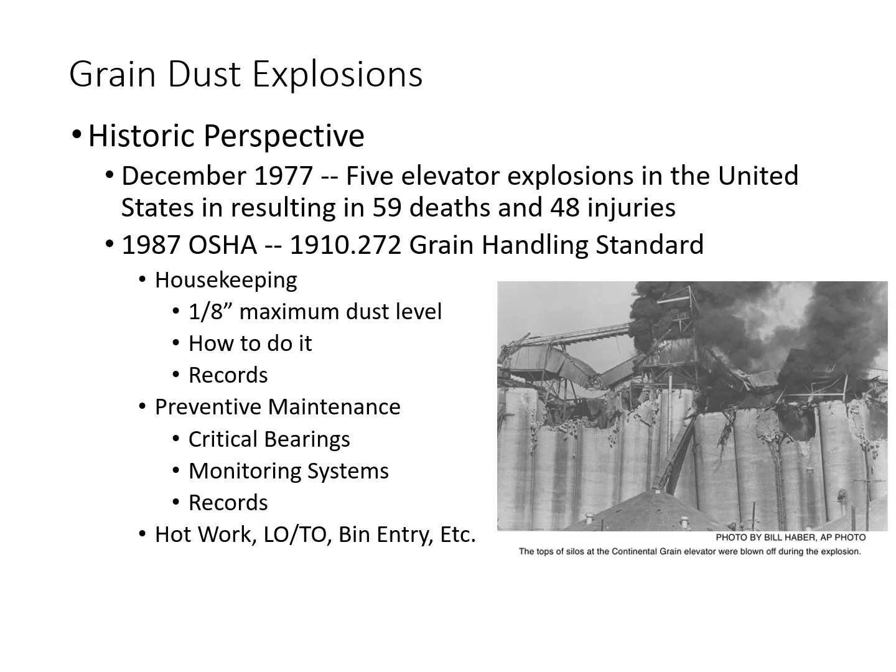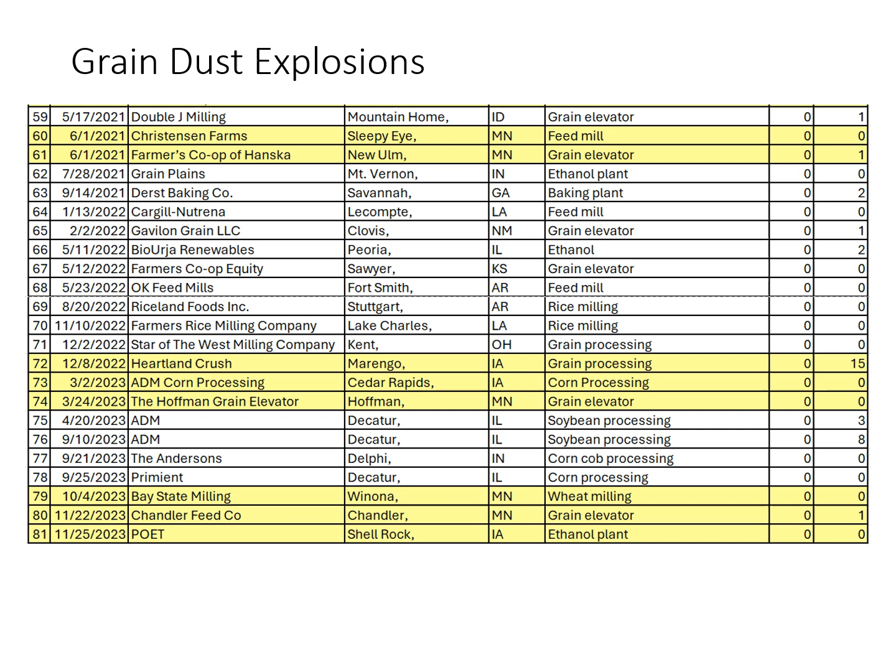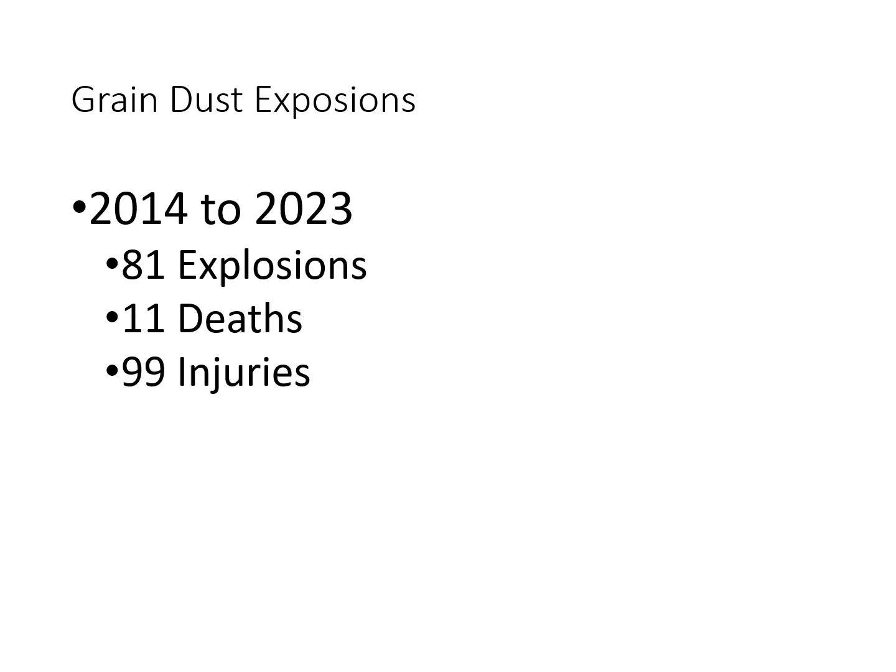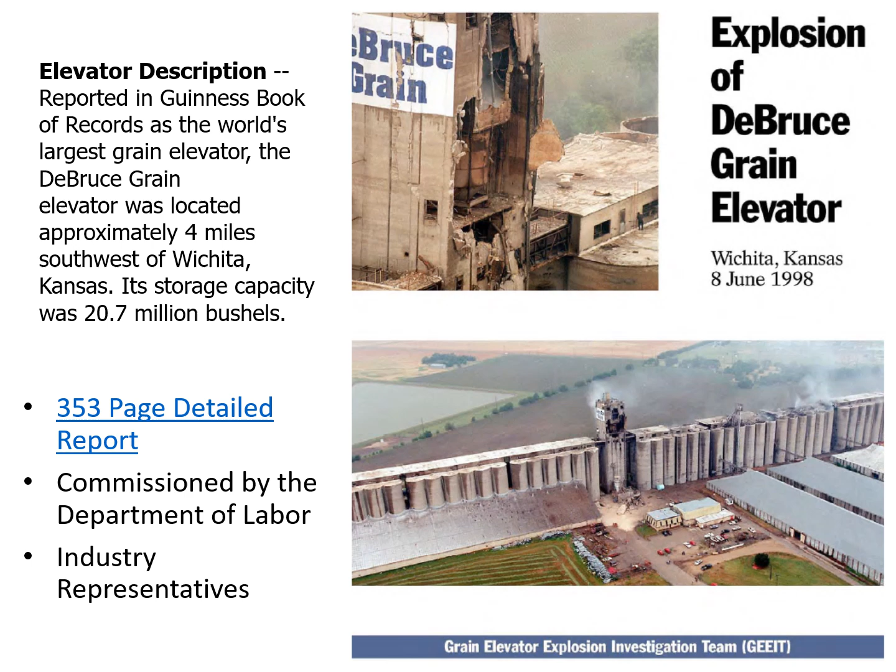But we need to do everything we can to reduce the likelihood of a grain dust explosion. Whenever I have the opportunity to talk to a group of people about grain dust explosions, I usually reference this DeBruce grain elevator explosion. I know it happened a long time ago, but the reason I feel it's a real benefit to share information from this report is that it was so extensively studied. There's a 353-page report that was commissioned by the Department of Labor, and it was very thoroughly investigated by representatives from industry, from insurance companies, from the government, and the report itself is really, really well done and very thorough.

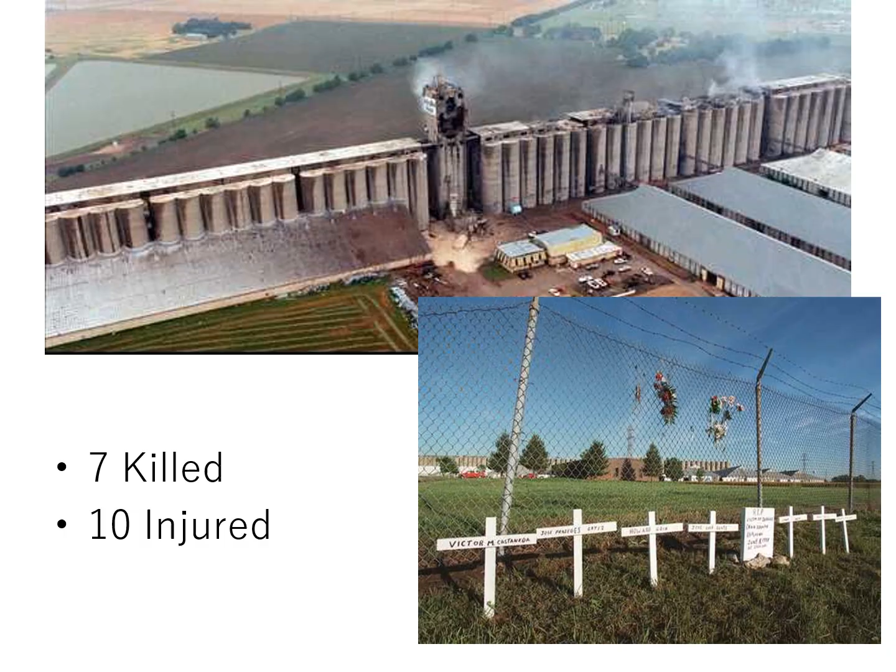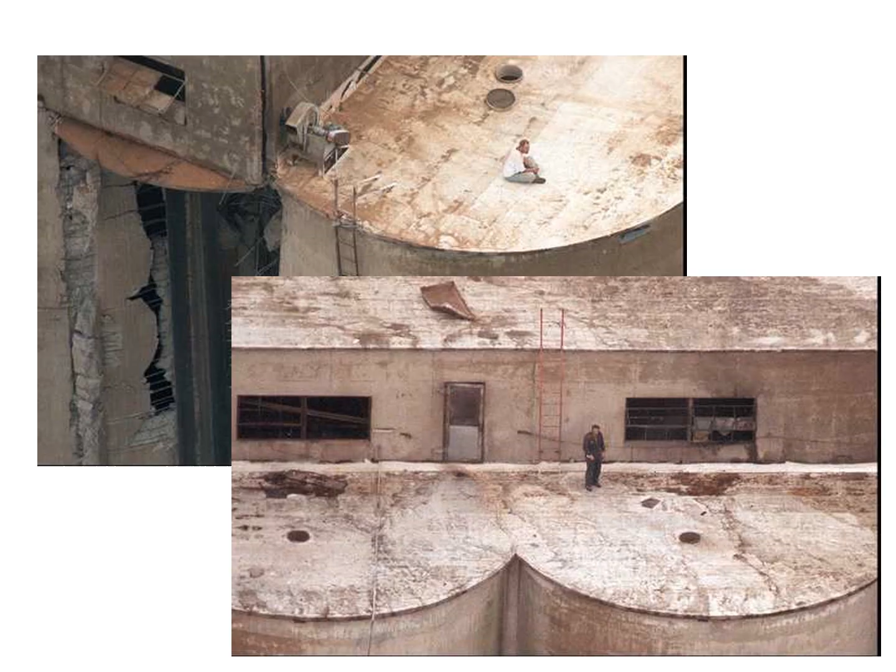More images of stranded workers, and these are the lucky ones.

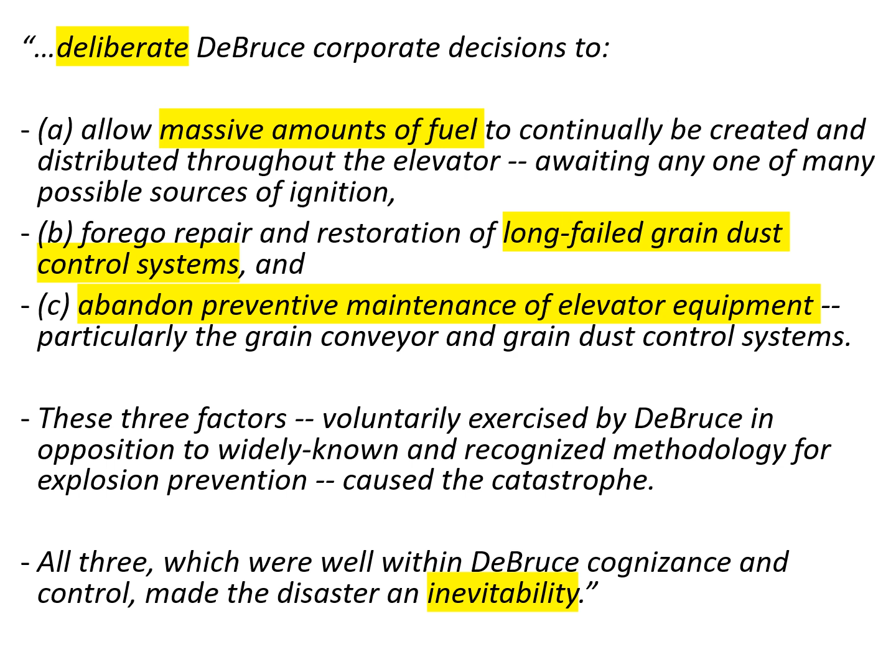So the summary of this study: basically it was a deliberate decision, and they allowed massive amounts of fuel to be created and distributed throughout the facility. They had long failed grain dust control systems that were not in operation. They had abandoned preventive maintenance of the elevator equipment. They had not replaced bearings, had not been providing proper grease and maintenance, and they basically made a dust explosion inevitable.

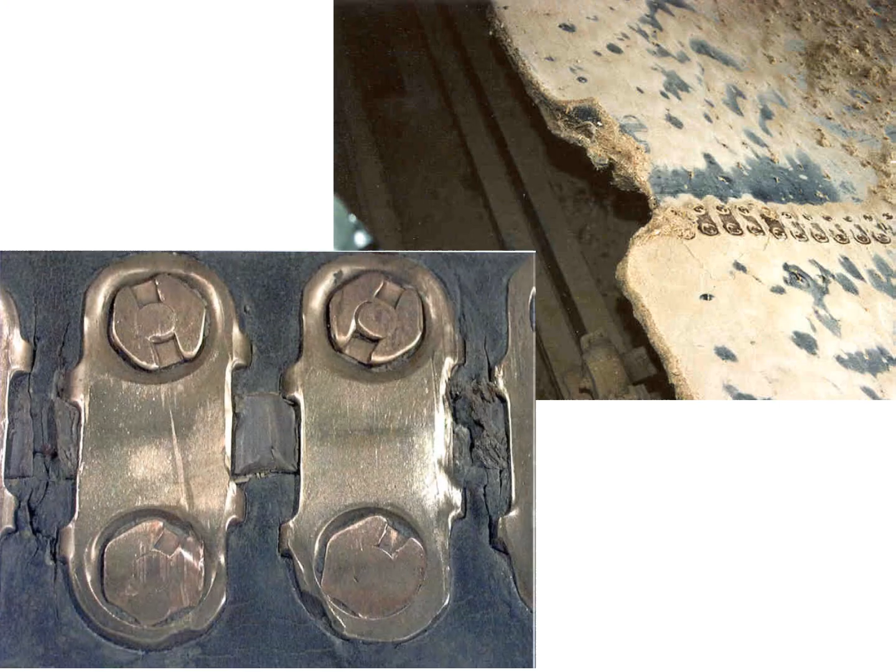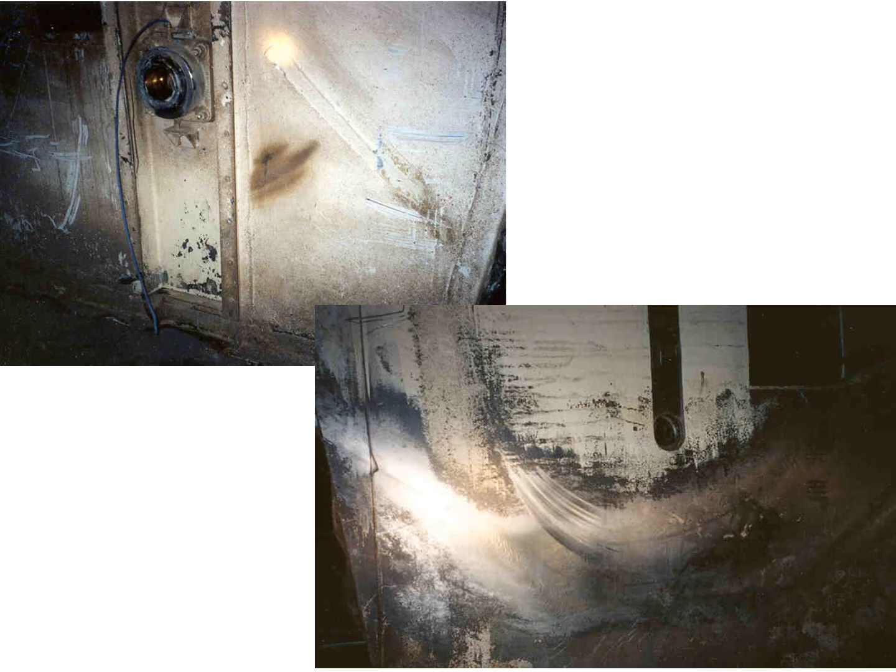Over time, the belt rubbing over that seized roller caused enough friction and heat to start a fire, smoldering in the dust. Eventually that smoldering fire generated enough heat to ignite the dust inevitably in suspension in that facility, especially in absence of the dust control systems that should have controlled the dust but were not in operation. While they identified the cause of this specific dust explosion, they also identified conditions elsewhere in the facility that could have caused a dust explosion as well.

This is the trunk of a grain leg in the facility, and you can see how the belt had been running out of alignment long enough to cut a groove in the trunking and to discolor the paint. It's fairly obvious that there was a lot of heat being generated by this belt running out of alignment.

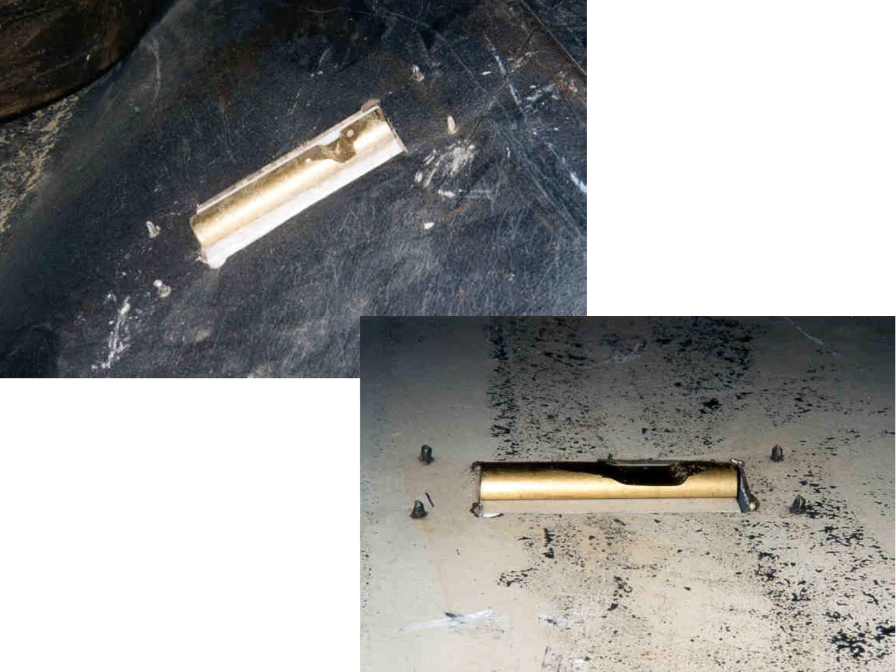These are some rub blocks, again from a trunk of a grain leg, that would signal to the belt being out of alignment. These rub blocks were not operational, and you can see the grooves that the belt had cut into them.

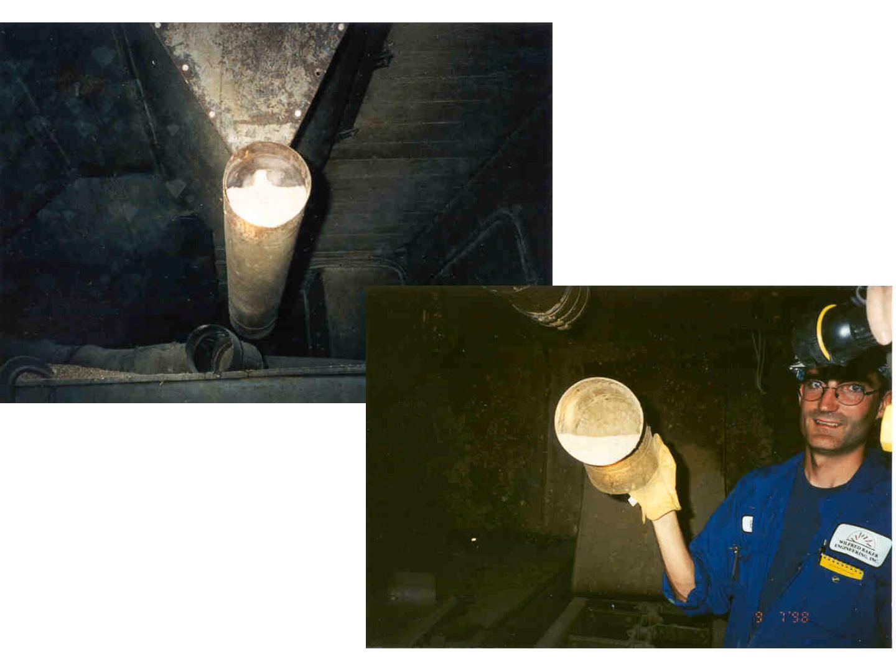These are pictures of the dust control system that was not operational. The equipment was there, it was simply not maintained and not kept in operation. At the trippers, hoppers, and transition points there would have been dust control originally on this facility, or retrofitted to keep dust levels down, and none of that equipment was operational.

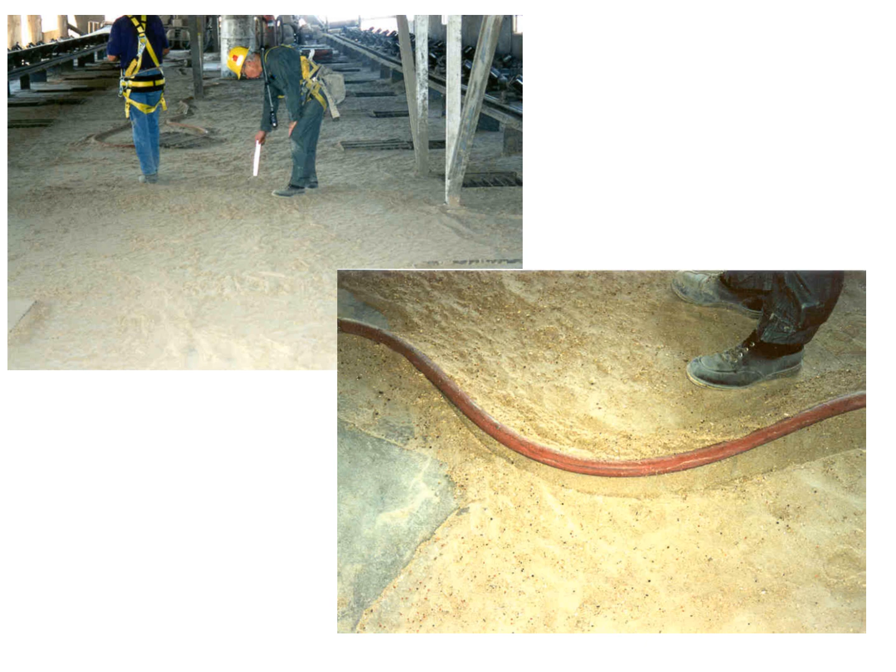Here's a picture of the dust levels up in the gallery, or the Texas house, of this facility, and you can see there's plenty of fuel here. This dust needs to be at an 1/8 inch or less in the critical areas of a grain elevator, and obviously in this case the dust levels were much higher.

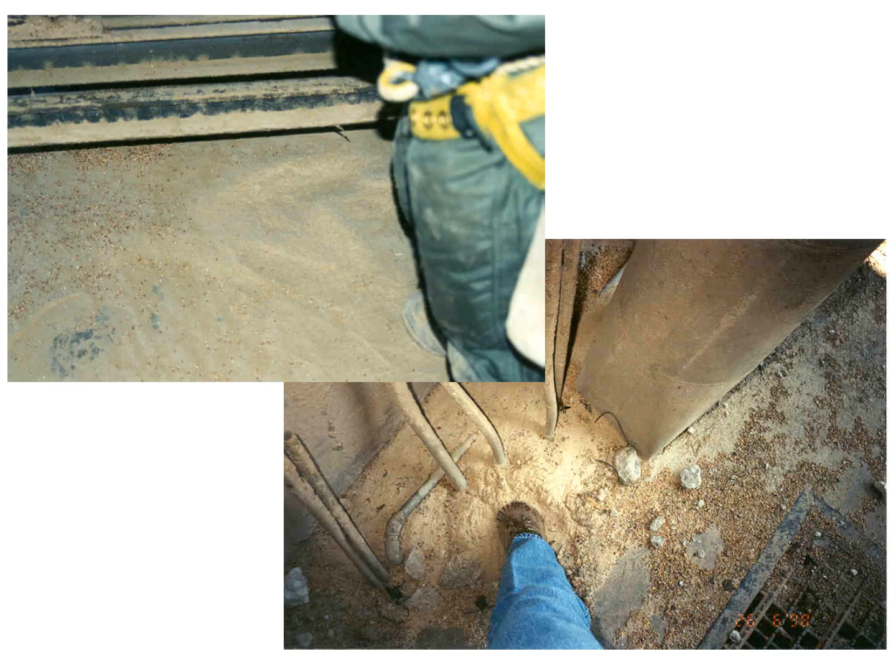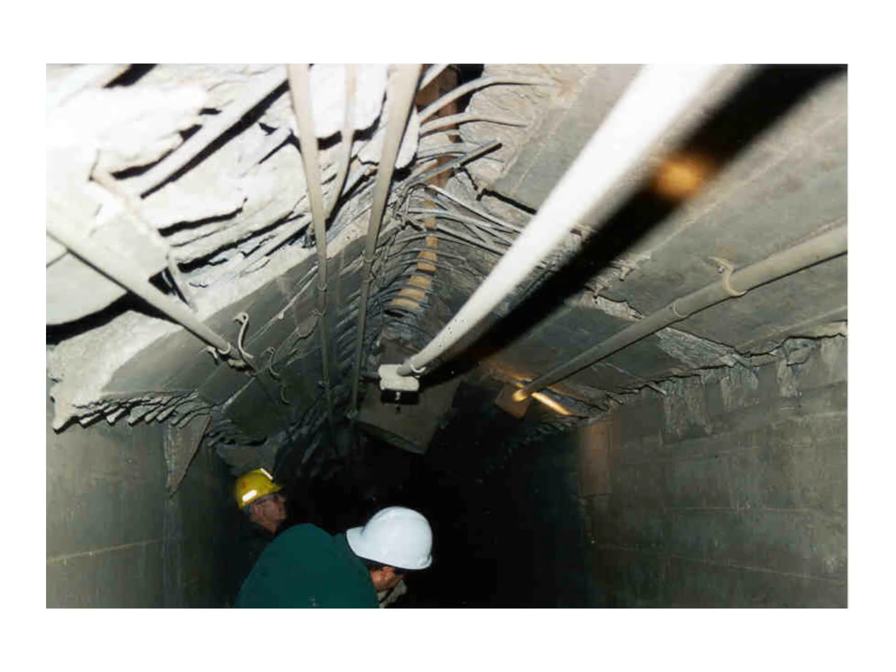More examples of the dust level in the facility. Keep in mind, after that primary explosion, all of this dust is shaken loose and suspended in the air to cause the secondary explosions that continue to blow the facility apart. Here's how the ceiling of one of the tunnels was deformed by the dust explosion.

This ceiling would have been flat originally before the explosion. Significant amount of power and pressure to cause this much damage in a facility.

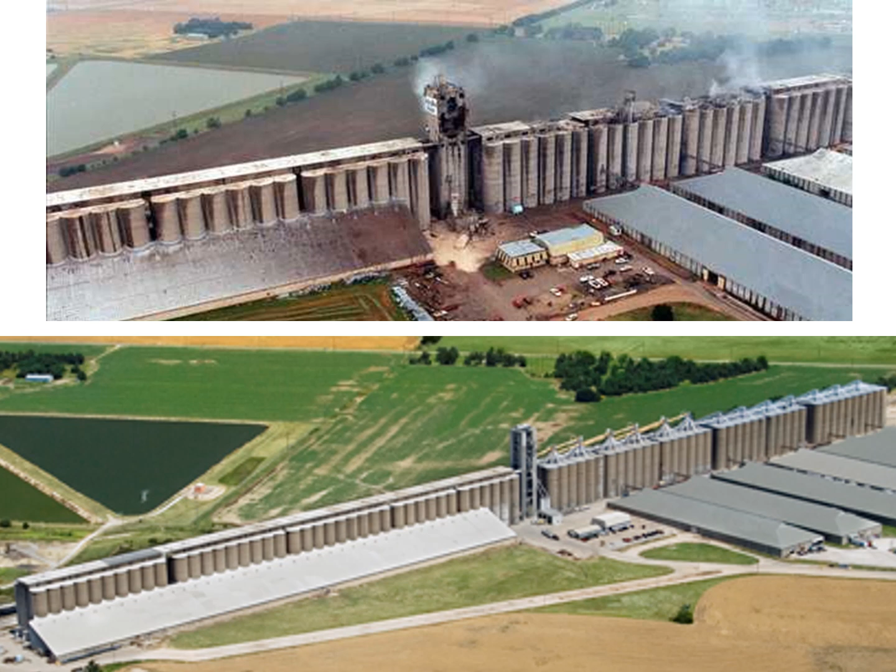Here's the before and after picture of the facility. Obviously, when we put these back, we don't enclose the workhouse or the legs anymore, so that is open air. You can also see on the right where all the damage occurred was replaced with open conveyors and more traditional distributor systems, and no longer have the open belts like it did prior to the explosion.

Another case study I like to talk about is the 2021 dust explosion in Jefferson, Iowa. The reason I like to talk about this is because this is a facility I have been through hundreds of times during my 36 years in the grain insurance business. I was lucky enough, many years ago, to work with the management at what was West Central Co-op then, and they kind of took me under their wing and taught me a lot about prevention of grain dust explosions because of some past experience they had at this facility.

We'll start by talking about this dust explosion in 2021. It was a miracle that nobody was killed or injured. What had happened is they had some grain go out of condition in a steel bin, and they were in the process of transferring that grain to deal with it. When doing that, they moved some burning or smoldering grain into their workhouse and caused the explosion that you see here.

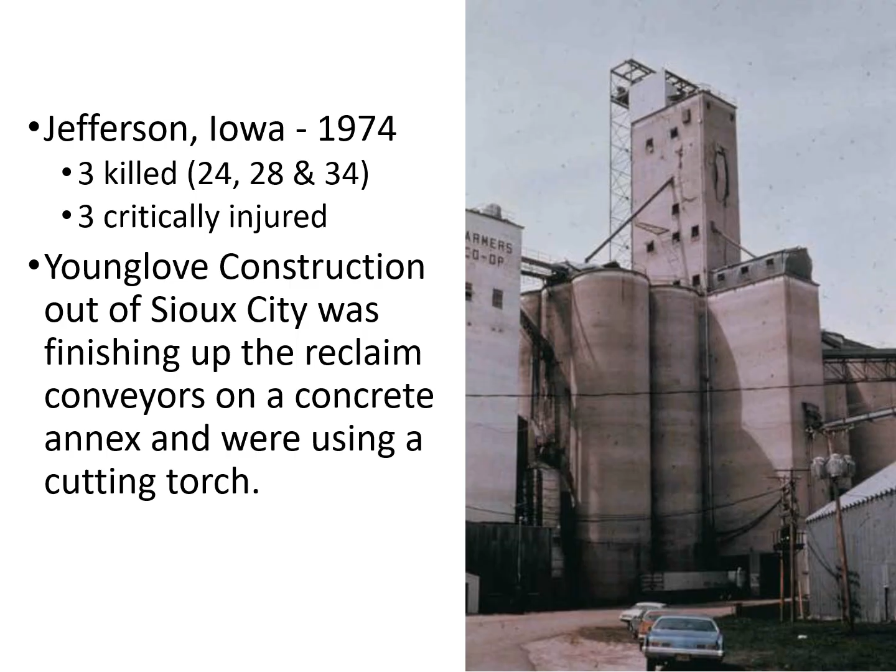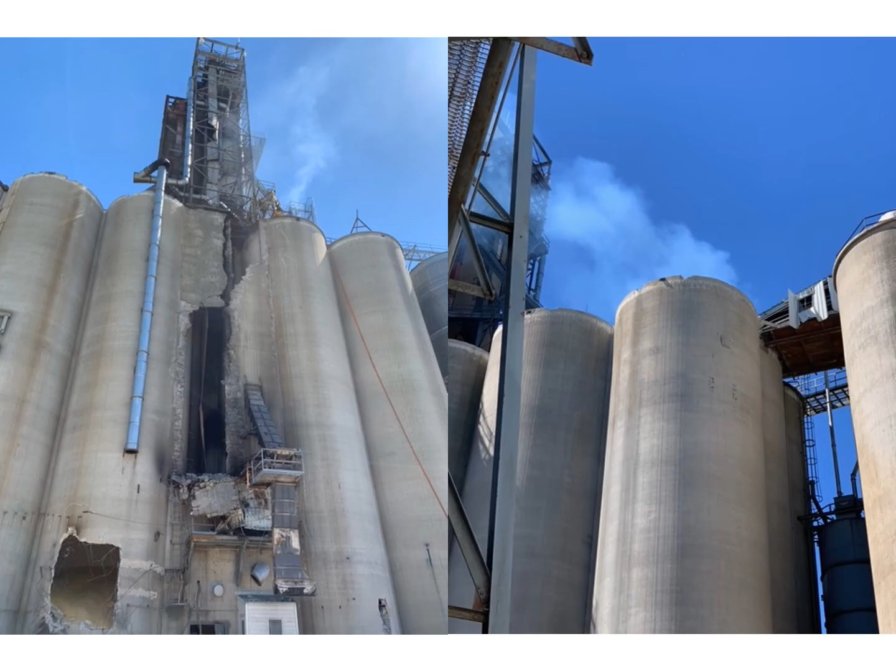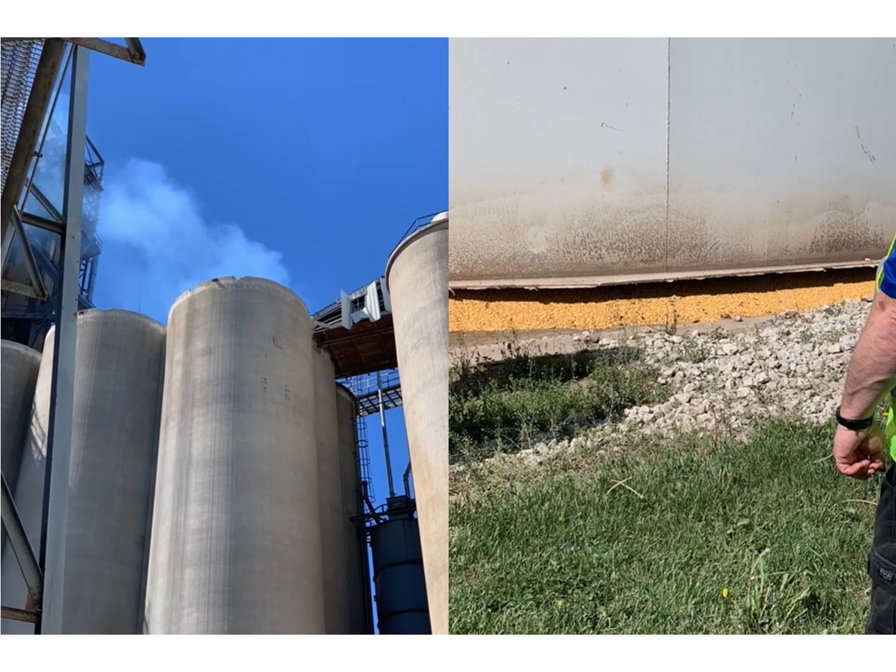Here's the back side of the elevator from the 2021 explosion, and you can kind of see the legway, the interstice, and the bin tops, and the damage that was done. If I understand the 2021 explosion correctly, the origins were in the tunnel or conveyor underneath this steel bin on the right, and that primary explosion transferred the ignition to the workhouse, where the secondary explosions caused the significant damage to that cement elevator.

So this is what was left after all the cleanup. Clearly there was significant damage to this facility, and it was subsequently torn down and replaced with a couple of concrete silos and an outside leg or legs.

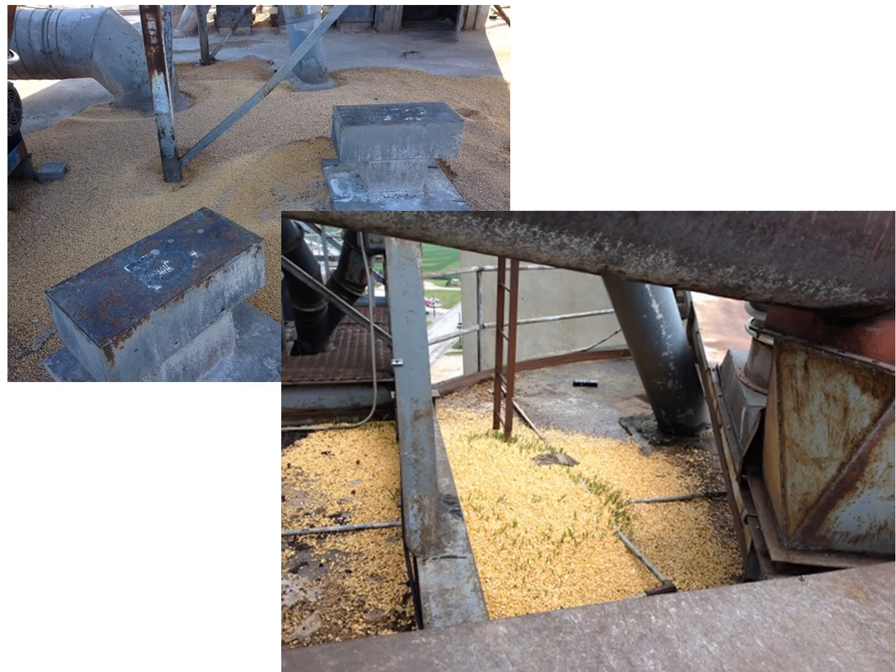Just want to share a few housekeeping slides. When I was working in the field just a few years ago, this is some of the things I would find, and quite often the housekeeping records would show that this was cleaned 2 or 3 days ago. But when I'd go up in the man lift and walk across the bin tops or down in the tunnels, I'd see housekeeping that clearly hadn't been done for a long time. That lower right picture, you see the corn sprouting and growing on that roof. You've got to maintain your housekeeping.

It's very important. Even though this doesn't necessarily contribute to a dust explosion, it certainly does contribute to the deterioration of that roof. If you cause some heat or some spalling, the watertight integrity is going to fail. Then you're going to start getting water into your bins, and that's going to cause spoilage and heat and grain hanging up, and all kinds of issues that you just don't want.

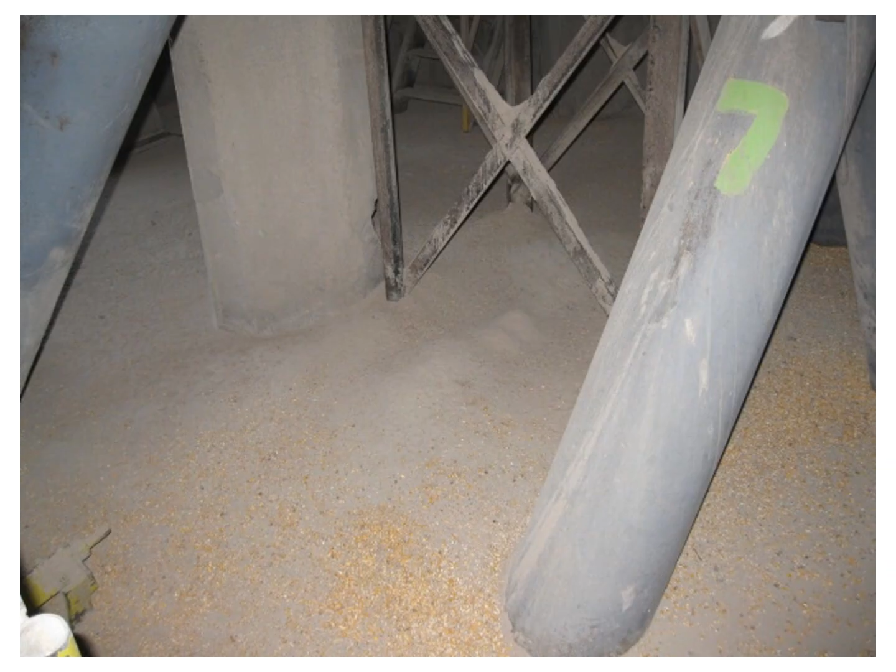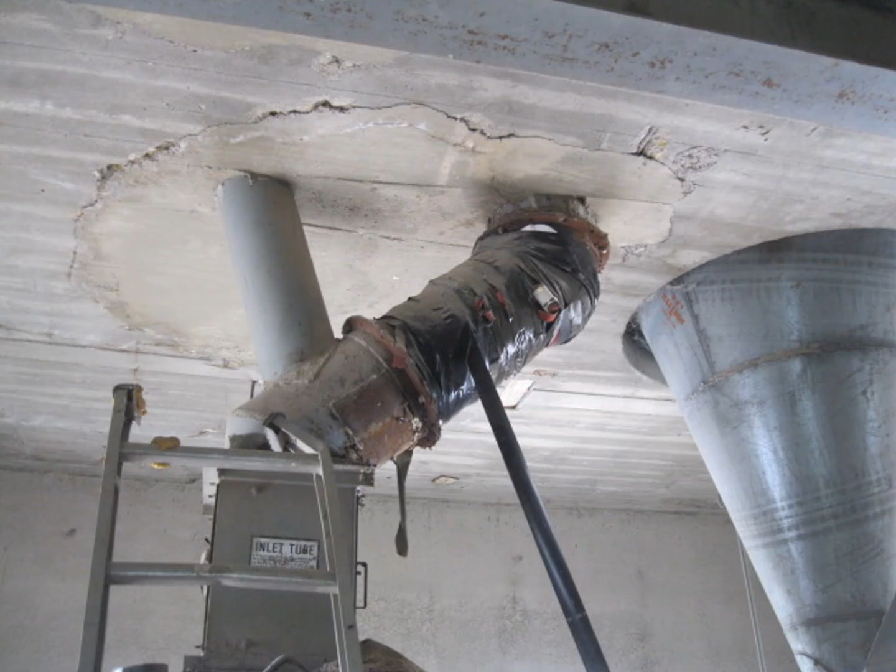So housekeeping is critical for a number of reasons in a grain facility. Just another example of a leak that generated and didn't get addressed, and it amounted to a real mess that needs to be cleaned up and maintained. And this is just an example of some deferred maintenance. We've got a ratchet strap mixed in there, a lot of duct tape, and a crappy ladder as well that's upside down and bent—just a condition that exists at the facility that needs to be cleaned up and fixed.

And this is just my last housekeeping example I'm going to give. Again, this is a facility where their housekeeping log showed they had cleaned this boot in the last week, and no, they hadn't. I mean, the levels of dust hanging on the cobwebs and all of that just shows that the housekeeping has been very lax. And this is the kind of thing that causes a tremendous amount of fuel if you ever do have an ignition source and a primary explosion.

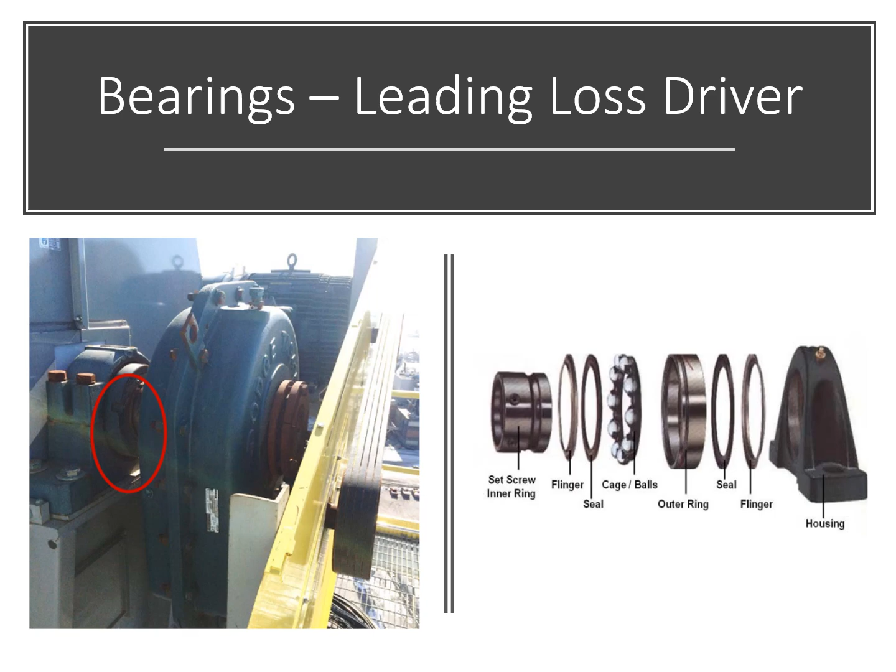We can't talk about grain dust explosions without talking about bearings. Bearings are the leading cause of grain dust explosions, and they require a lot of effort in record keeping and in preventive maintenance. And again, the grain handling standard specifically addresses preventive maintenance and critical bearings. And as I said, bearings require periodic maintenance and changing them out.

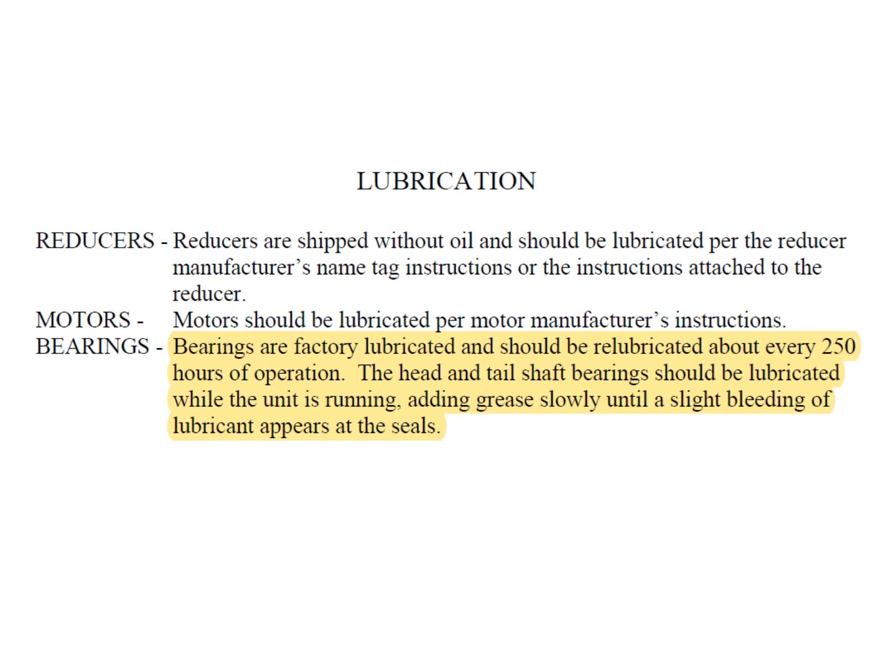And a lot of these guidelines are found in the original manuals that come with the equipment that you have in your facilities. And obviously with the age of our facilities, sometimes that's not an easy thing to do. So for that, you need to work with your millwrights or your construction folks and put a plan together and make sure that these bearings are lubricated appropriately and maintained and changed out at the intervals that are recommended. Here's an example of a form for bearing analysis and the schedule that you would use.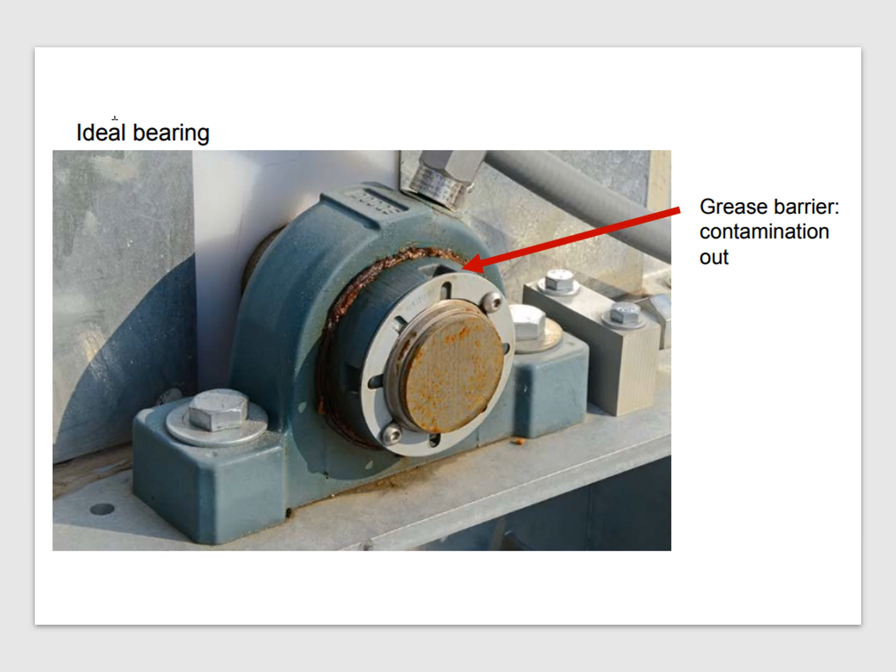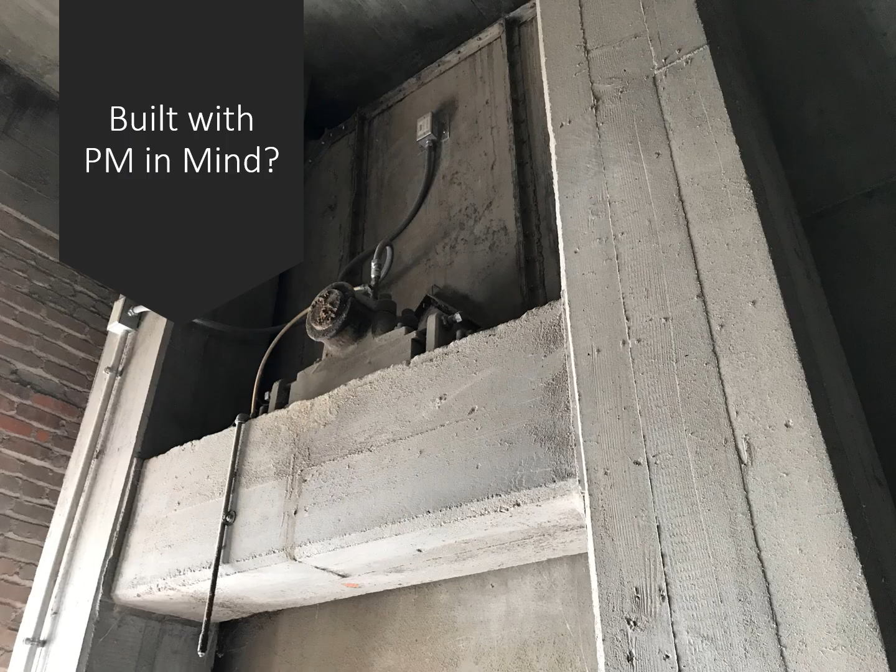A lot of the bearings in our grain facilities are hard to get to. This is an example of a leg head in an older grain facility, and you can see on the left side there they have a remote zerk that actually feeds up into the bearing to make it possible to grease it from the working surface and not having to use a ladder. So just think about that as you're going through. The easier you make the preventive maintenance, the more likely it is that it's going to occur.

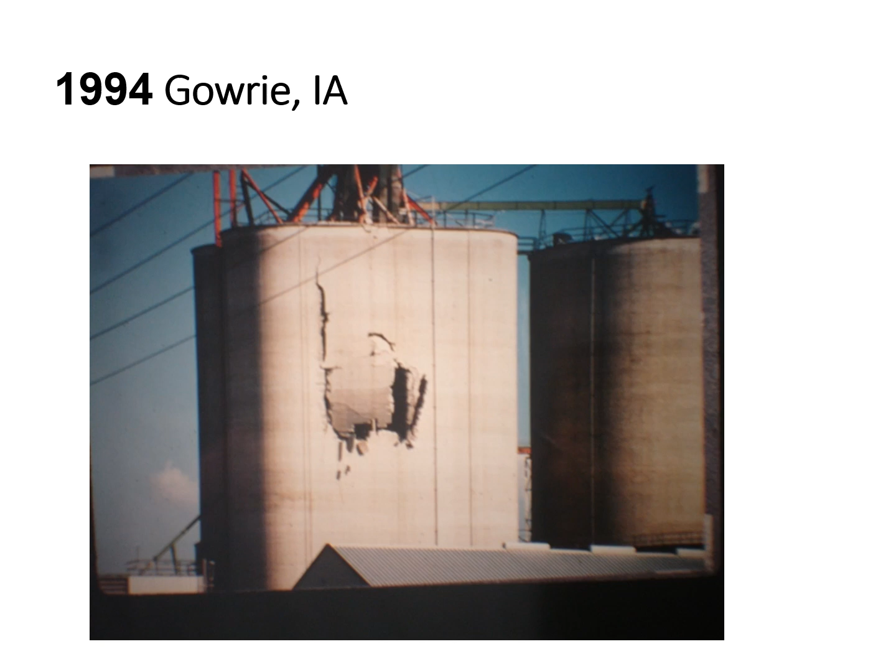Another part of the grain handling standard has to do with hazard monitoring equipment, and we're going to talk a little bit about that. This dust explosion happened back in 1994 in Gowrie, Iowa, and I was very familiar with this facility back then, and I was able to get on site shortly after the dust explosion. I've got a slide tray somewhere with a lot more pictures, but this is all I have right now.

This dust explosion caused one fatality and one very serious injury, and the elevator worker was standing on the dump grates when the explosion occurred, and she was literally blown out of her boots and was killed. Her body landed on the roof of the flat grain storage adjacent to the grain elevator. And the truck driver was down in the boot investigating the belt speed alarm, and he suffered very serious burns when the explosion flashed past him on its way out of the facility.

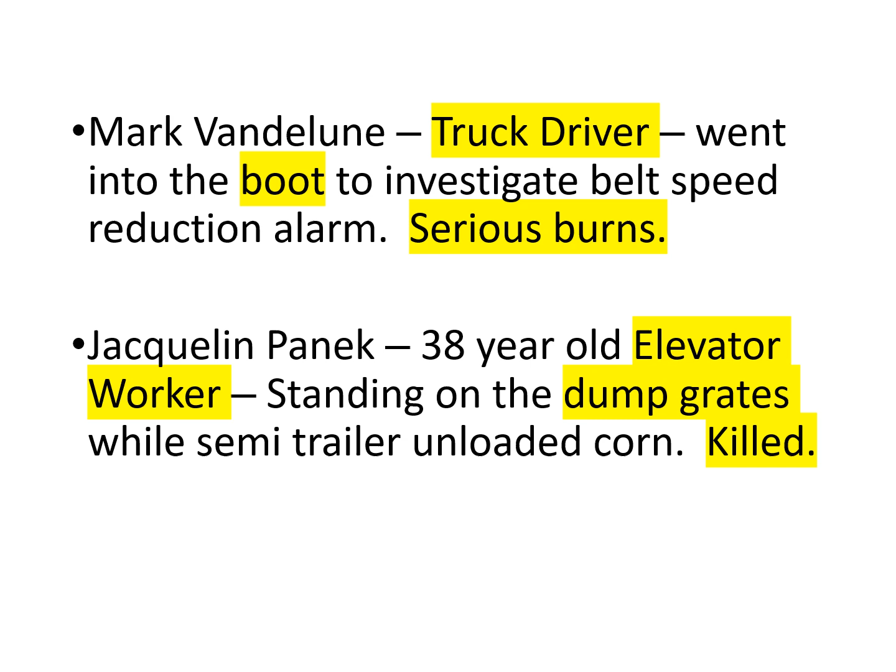The cause of this explosion was actually a slipping belt, and a fire started at the head of the leg when the belt slowed down and the belt was slipping. And it turned out the speed monitor was installed incorrectly on this leg. Nothing was connected to the 10% slowdown alarm. Instead, the 10% slowdown alarm was connected to what should have been the 20% shutdown. And then there was actually no automatic shutdown that should have been installed at that 20% level.

So the truck driver just happened to be in the tunnel to investigate the alarm when the explosion occurred, and the worker was on top of the grates and was killed when this explosion occurred.

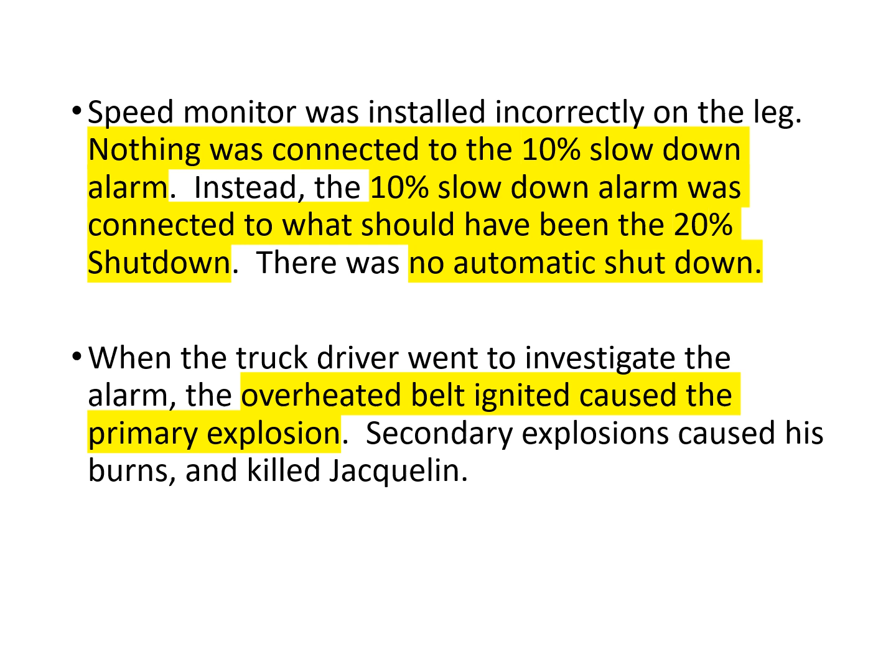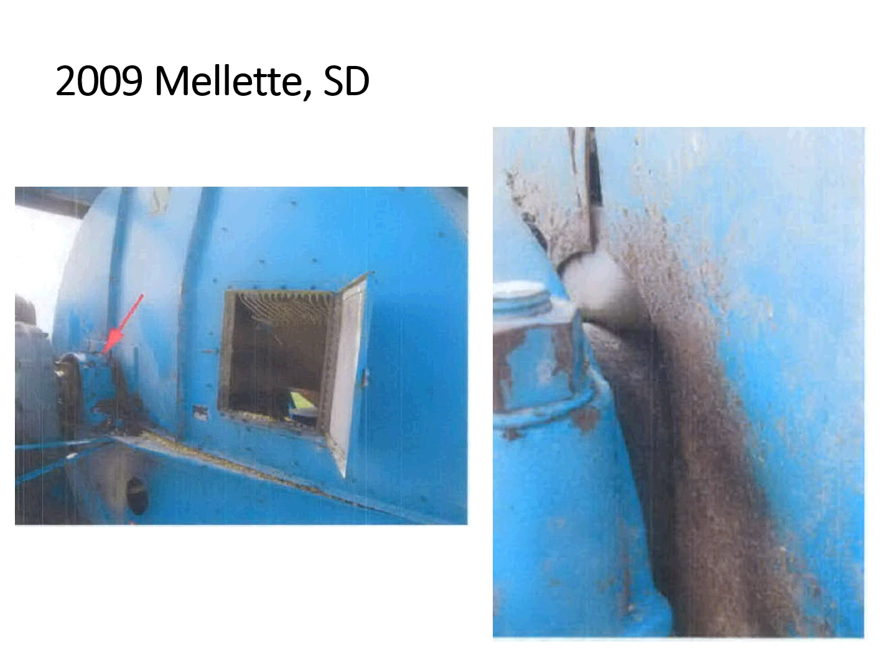Another example I like to share as it pertains to hazard monitoring equipment is this dust explosion that happened, again, a long time ago. This was in 2009 in South Dakota. This is one of South Dakota Wheat Growers' or Agtegra's facilities back in the day. And this was a bearing failure at the leg head in a relatively new grain facility.

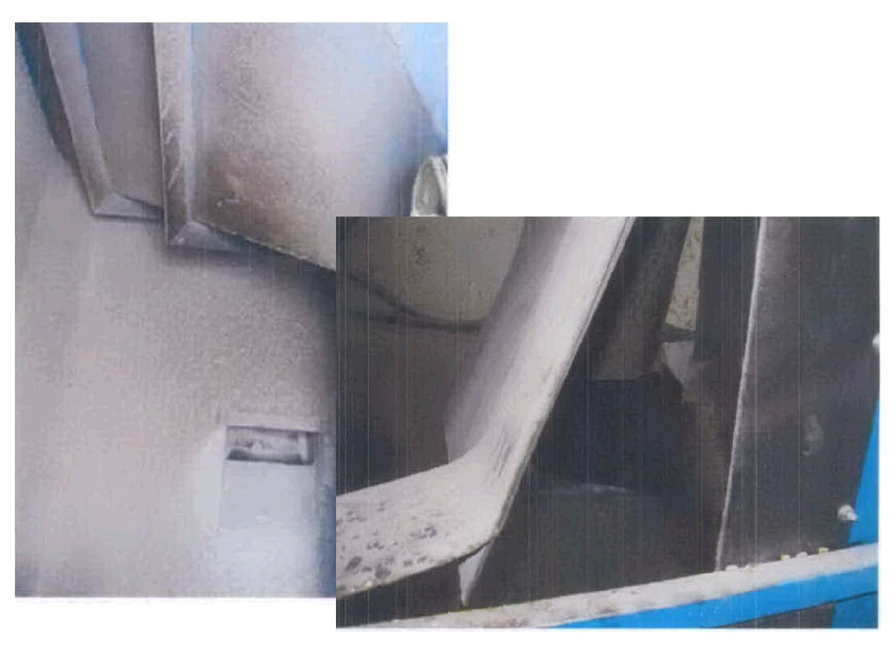So in this case, a bearing failed on the leg, and the primary explosion occurred in the leg, and it was able to vent through kind of a workroom in the concrete elevator, and this is the door to the outside where the explosion was able to vent. And I can't remember if this was a scale hopper or a cleaner of some kind, but this is again where that primary explosion was able to vent relatively harmlessly to the outside.

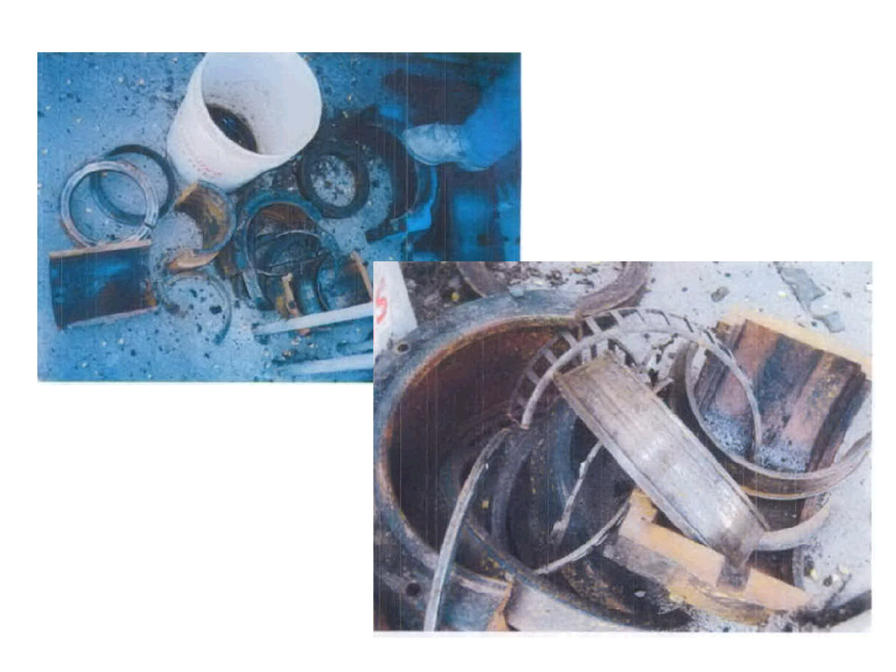Here's the bearing that failed, and you can see it's a very large bearing. The shaft diameter is roughly the same as a 5-gallon bucket, so a big bearing, and it was relatively new. So this was a case where the hazard monitoring would have been very helpful in identifying that this bearing was getting hot and about to cause a problem.

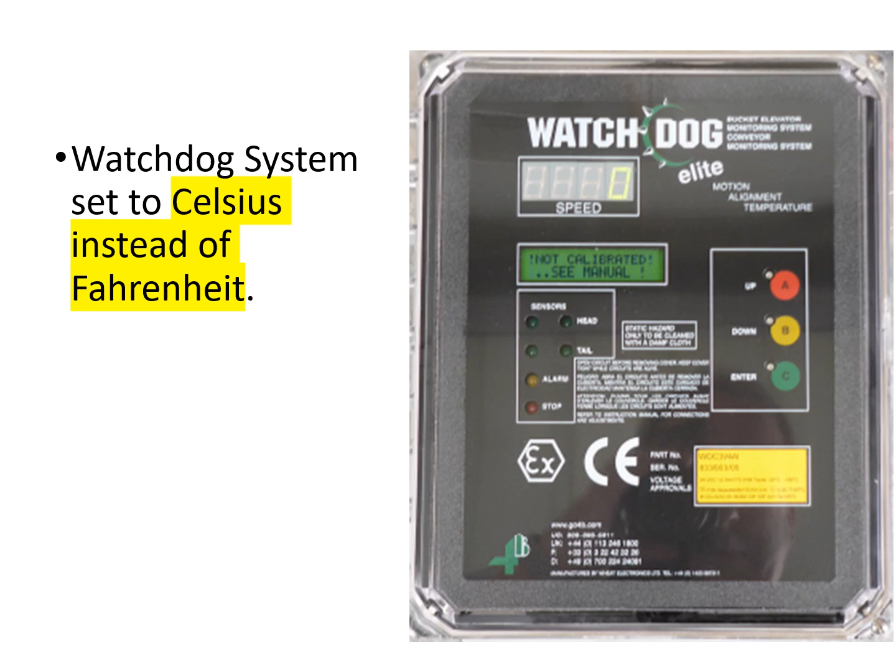Unfortunately, the Watchdog system in this facility was set to Celsius instead of Fahrenheit, and the set points were such that the alarm didn't indicate that the bearing was hot, and it allowed the bearing to get hot enough to cause this explosion.

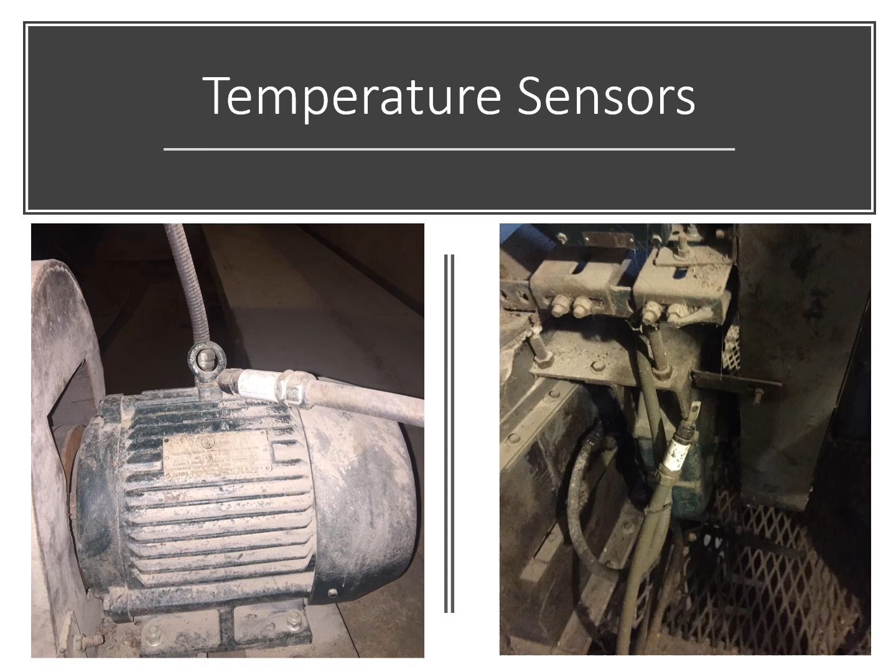But there, the gearbox is leaking, and in fact, it was low at the time of my inspection, and I'm guessing it actually was getting hot, and that the alarm that was going off because of that gearbox temperature was indeed justified, and that's a problem. When you have an alarm going off, you need to investigate it and fix it. Don't just disable or disconnect the sensor.

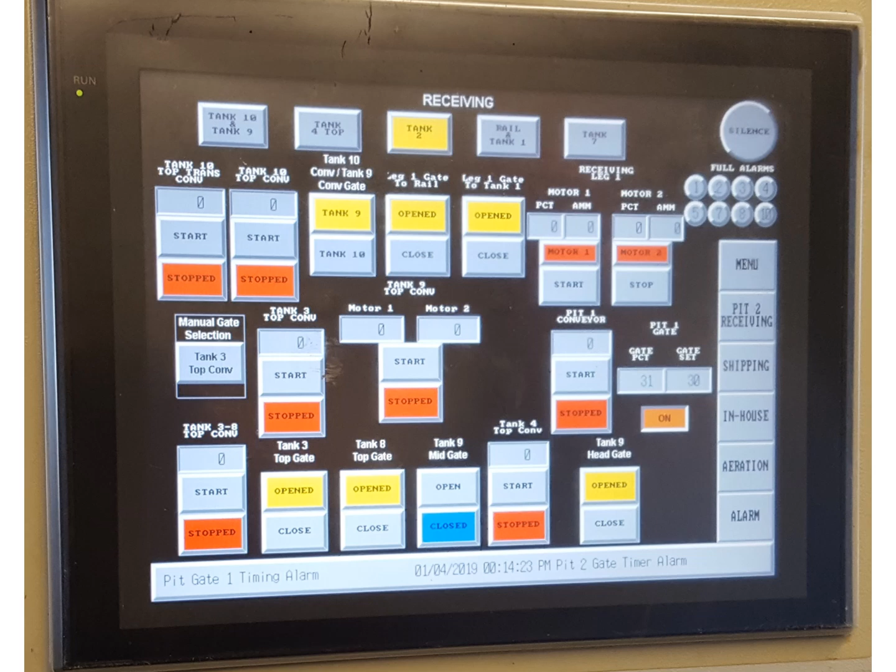And if you work at one of these facilities, I really encourage you to become familiar with your hazard monitoring systems and to audit it yourself. Check and make sure that the set points make sense. And you might need to vary these depending on the weather conditions and the ambient temperatures. In the middle of winter, when it's 30 below zero, you're probably going to want to have different set points than in the summer when it's 100 degrees with the sun shining on the bearings. So just kind of keep that in mind as well.

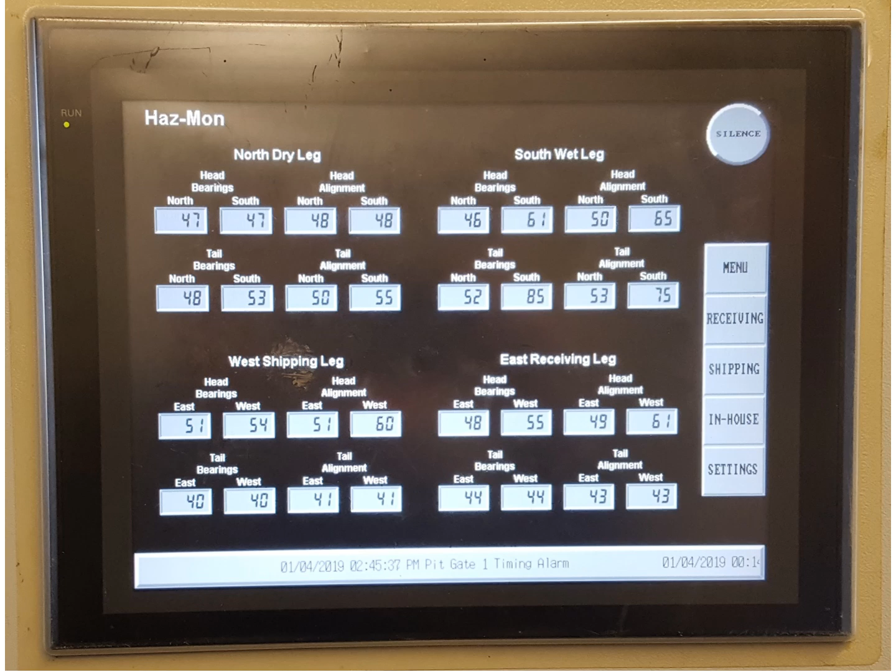Educate yourself, get familiar with the equipment, and change these set points as it makes sense and as you're instructed to by your management and your safety personnel. Here's just an example of another type of alignment sensor on a grain leg, and these are very critical in maintaining the safety of a grain handling operation. And again, inspect, and as you're walking by something, look and make sure they're in place and doing what they're supposed to be doing.

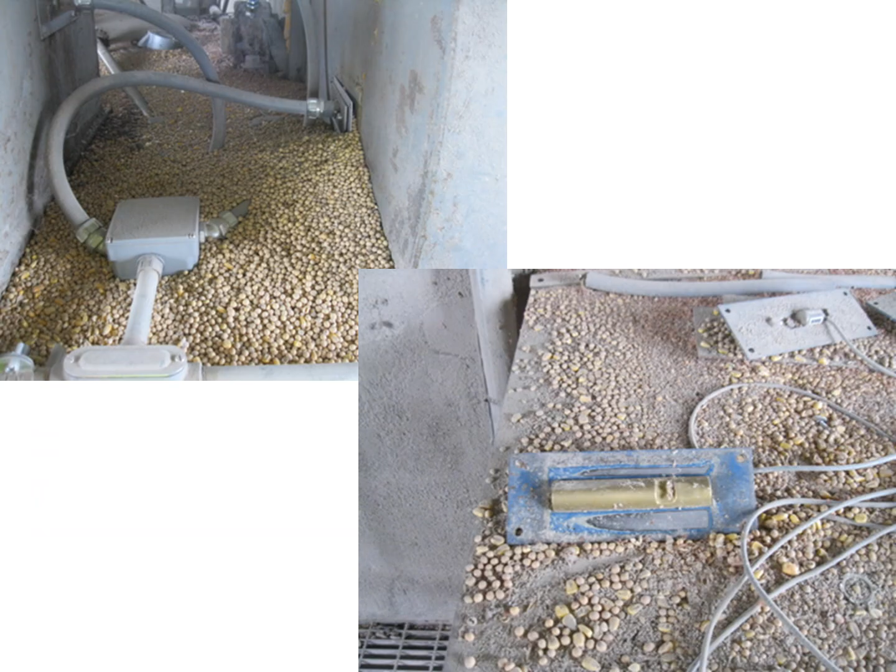Here we've got an example of, in addition to the bad housekeeping, rub blocks that aren't maintained and in place the way they should be on a grain facility. Electrical systems are another source of heat that can lead to a dust fire or a dust explosion. This is something we see quite often in grain facilities.

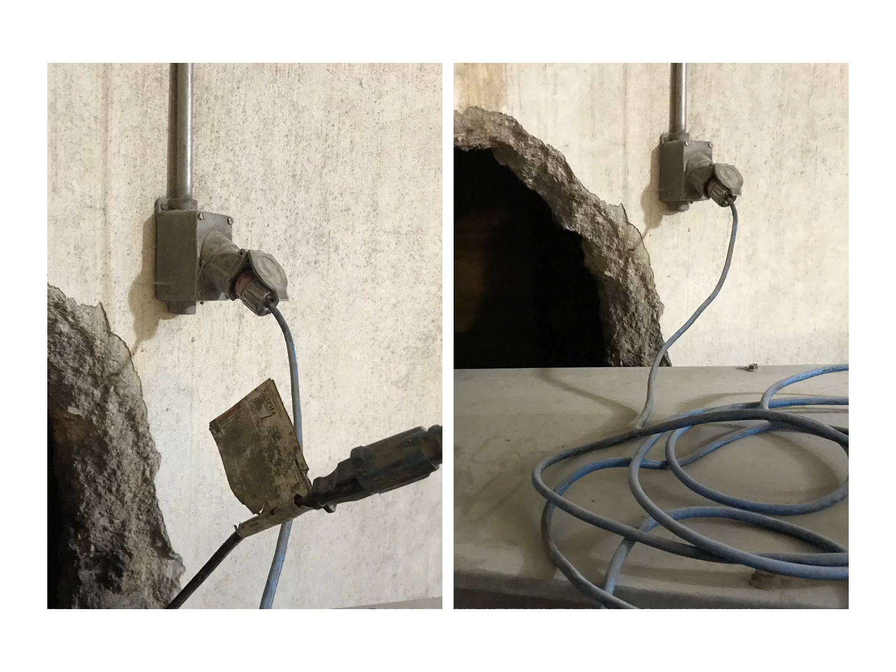In this example, they're running a sump pump using a pigtail that takes the approved, intrinsically safe, dust-tight electrical system and just turns it into a standard power cord. This is not a safe operation in a grain facility. There's just too much dust present. If you need a sump pump, you're going to have to find an intrinsically safe sump pump that is not going to cause a potential ignition source in the dusty environment.

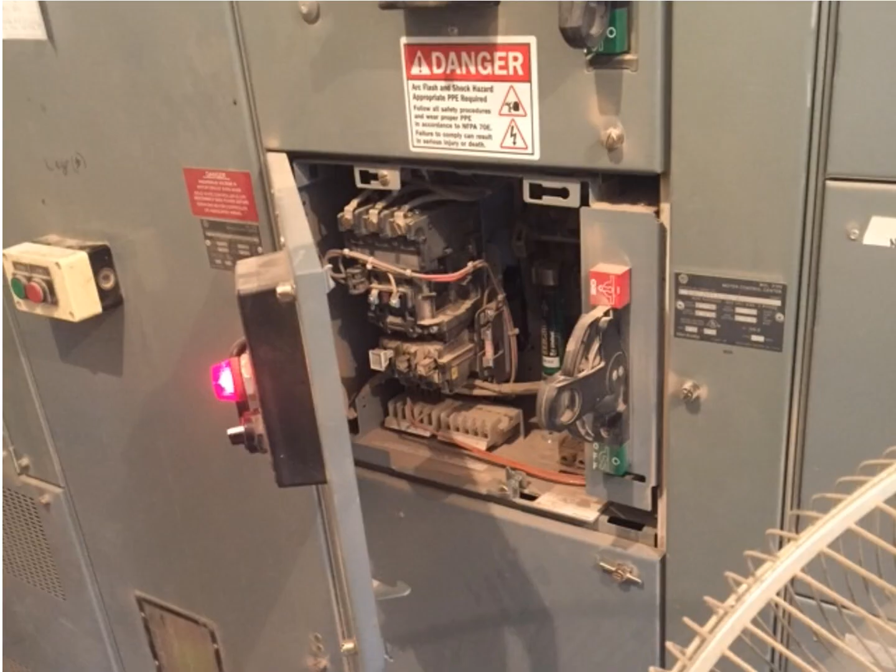Part of your maintenance program at your grain facility needs to include a good clean and tighten program with a licensed electrician who comes in periodically and just maintains the equipment and makes sure everything's clean and tight.

I'm a huge advocate for thermal imaging, infrared analysis of your facilities. I can't remember a time when we did a thermal analysis of a grain facility and didn't find at least one significant issue. And your insurance companies typically have the manpower and equipment to do this. And I would encourage you elevator folks to have your own thermal imaging camera to do this type of work yourself. You don't have to necessarily open the panels.

You can find a lot of issues by just taking the camera out in your facility while it's in full operation under full load and looking for hot spots. Not only will thermal imaging find electrical concerns and loose connections and malfunctioning equipment, but it's also going to find hot bearings or hot motors or other issues that you might not otherwise have a sensor on or that you might not otherwise identify. And I would also encourage, if you have your own equipment, utilize your insurance company folks to train your people.

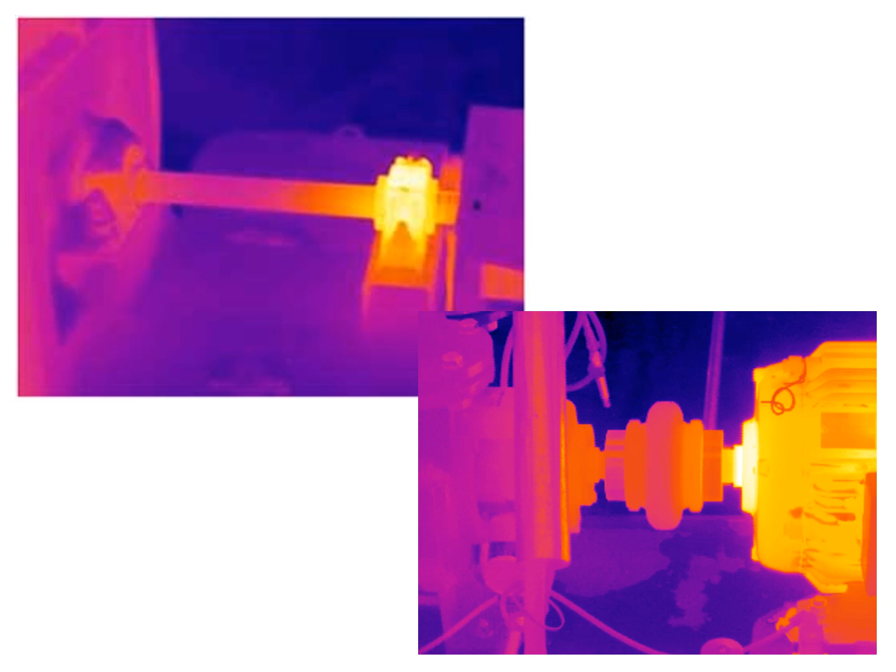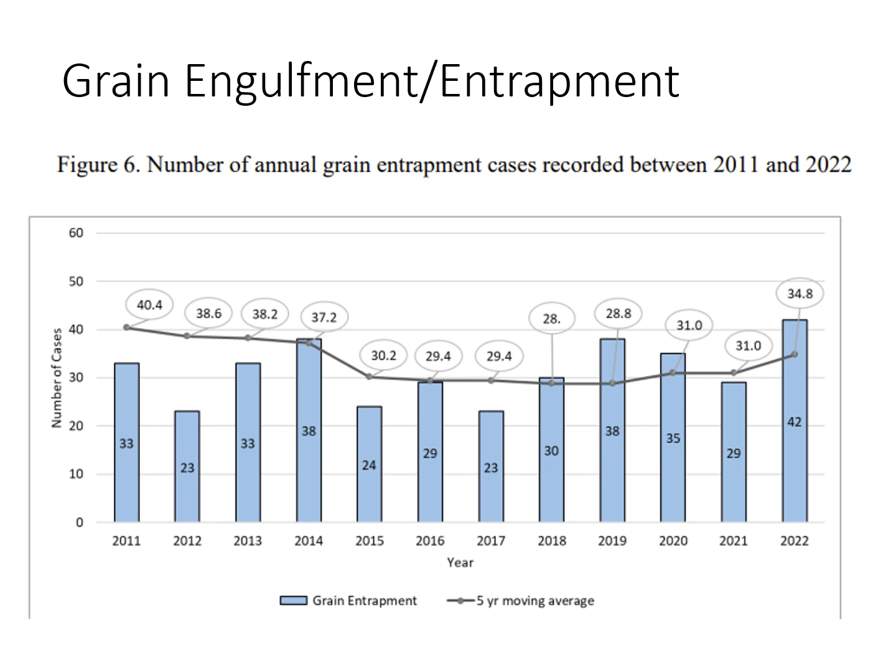Most of the engulfment situations that I've worked with have been a result of complacency. We have folks that spend a lot of time around grain and they feel very comfortable and they're willing to put themselves in a situation that they certainly wouldn't put their kids or, in a lot of cases, their employees, because a lot of these end up being a management level person who goes into a bin, maybe comes in early, maybe comes in on a weekend and does a task where they can maybe avoid some of the paperwork and some of the extra effort, thinking they're going to do it just like they used to do it.

So anyway, complacency is something that I define as the more time you spend dangerously close to a recognized serious hazard and are not injured, not only do you not recognize the hazard, you actually feel safer than when in an unfamiliar setting absent of any recognized hazard.

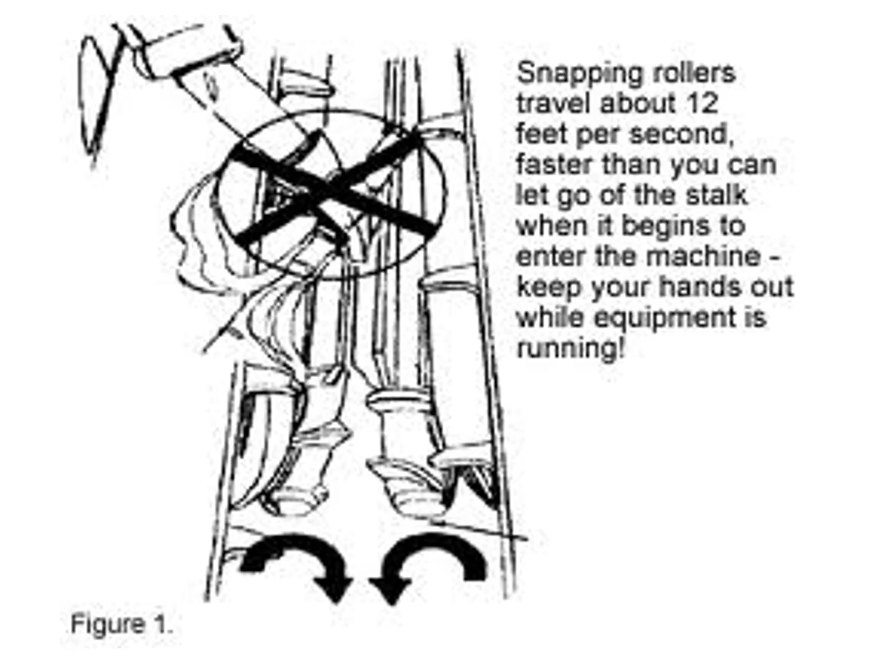diagram from an operator's manual from back in the day, and it talks about the snapping rollers that actually gather in the corn into the picker, travel 12 feet per second, faster than you can let go of the stalk when it begins to enter the machine. I personally knew 4 area farmers where I grew up that had lost either the hand or their entire arm and had farmer's hooks because of corn picker accidents.

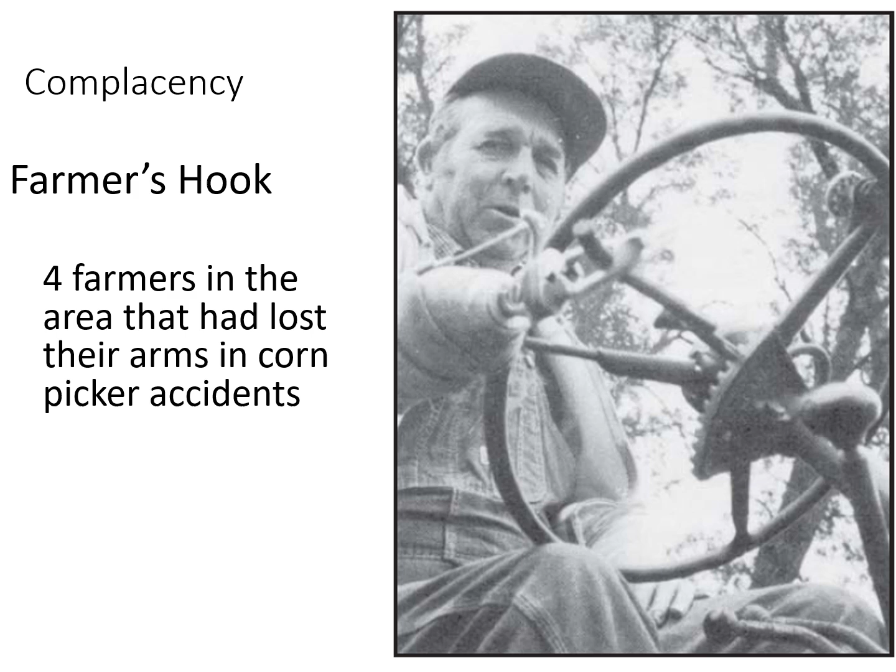The warning was clear. They knew that their neighbor had been injured, and yet they were still willing to take the risk to grab that plug while the equipment was running, and they suffered a serious amputation injury because of it.

Some of what makes these grain bins so hazardous, you can have bridged or hung up grain, and when the grain flows, whether from just normal reclaim or if there's some material hanging up or some spoilage and you end up having an avalanche or a grain flow from that, you can be quickly engulfed in grain. Entanglement can be caused by sweep augers or any of the other kind of reclaim equipment or conveyors that are out there.

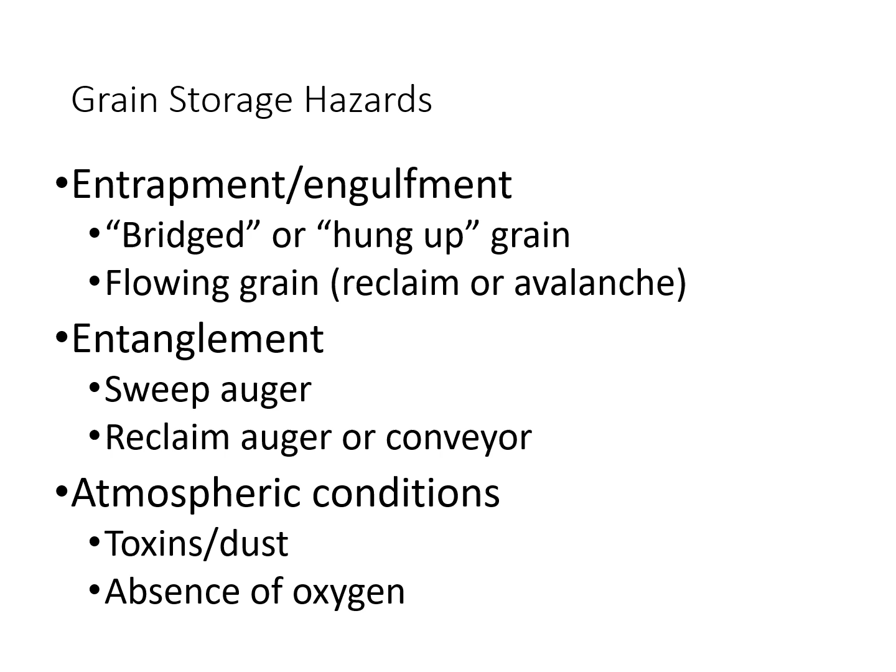And then there are also atmospheric conditions, toxins and dust, and then the absence of oxygen because of the spoilage or other things that could be welding or other things going on inside that space. Typically, bin entry is because of some grain quality issues. You have some spoilage going on, and there's a lot of information on how to properly store grain. Every land grant university has guidelines on temperature and moisture levels when grain's going into storage.

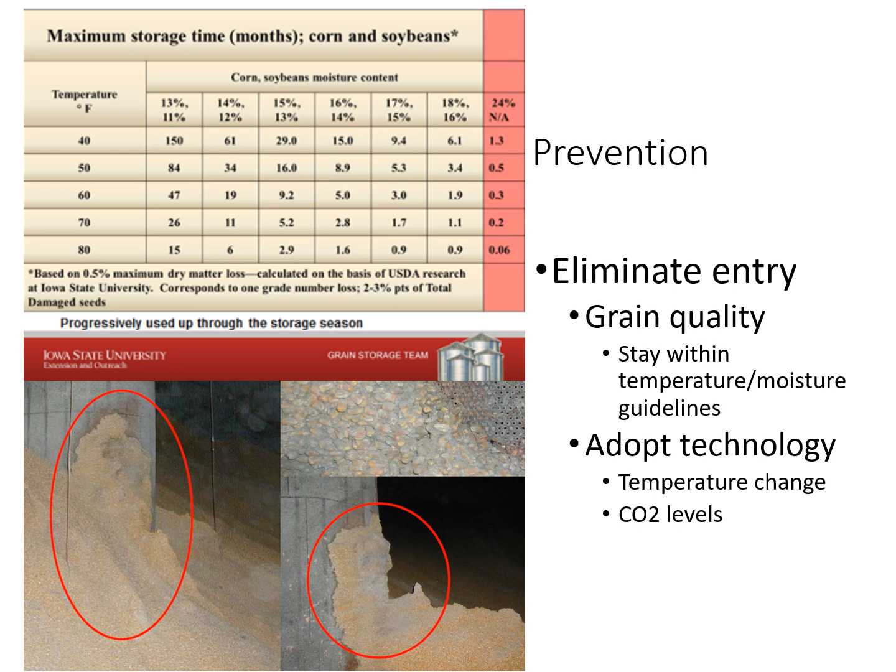And if you have some grain that you know is an issue, you need to put it into a bin or into a holding facility where you can more easily manage it and where you know that it's not going to require entry to clean that out. New technology as well, monitor temperature change, and then CO2 levels are another good indication of spoilage or issues going on with grain quality within a bin.

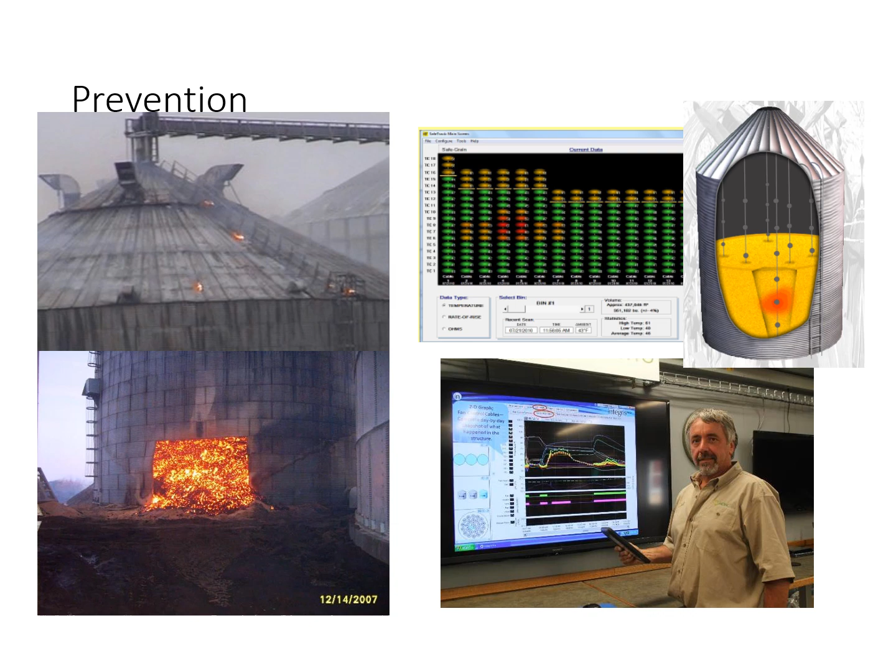So grain monitoring equipment has really come a long way. You can monitor it remotely from apps. There are companies that specialize in installing temperature cables and the software and monitoring sensors that go with it.

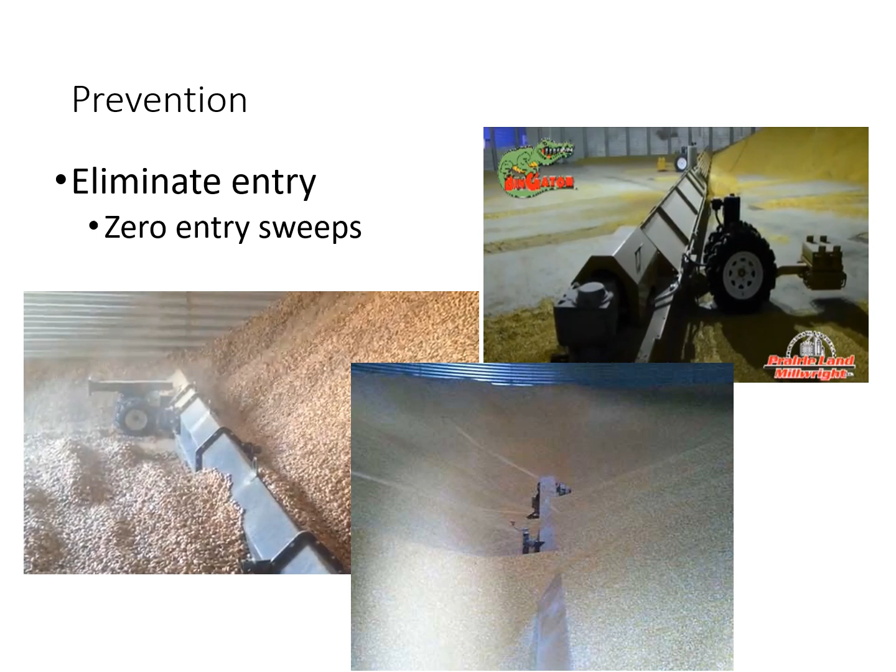Here's just an example of some zero entry sweeps in some grain bins, and again, recognize that it's against the rules to be inside a grain bin with a sweep auger and the reclaim system going. So just be aware of that, and really watch to make sure none of your coworkers are breaking the rules and spending time in these facilities where there could be an engulfment hazard.

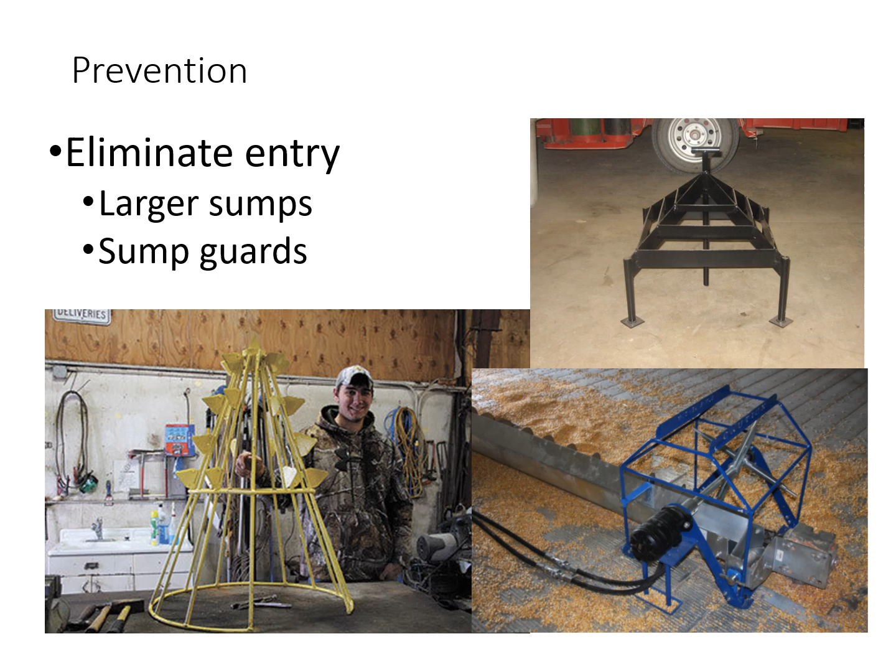Here are some examples of sump guards to kind of break up the material so that some spoilage or some bean straw or corn stalk don't plug your reclaim system. And I think the one on the left there is just like a 4-H or FFA project, and others are commercially available. But if you've got an older bin, a smaller sump, and you've had problems in the past, take some steps to make sure that you don't have to enter the bin to clear some blockage.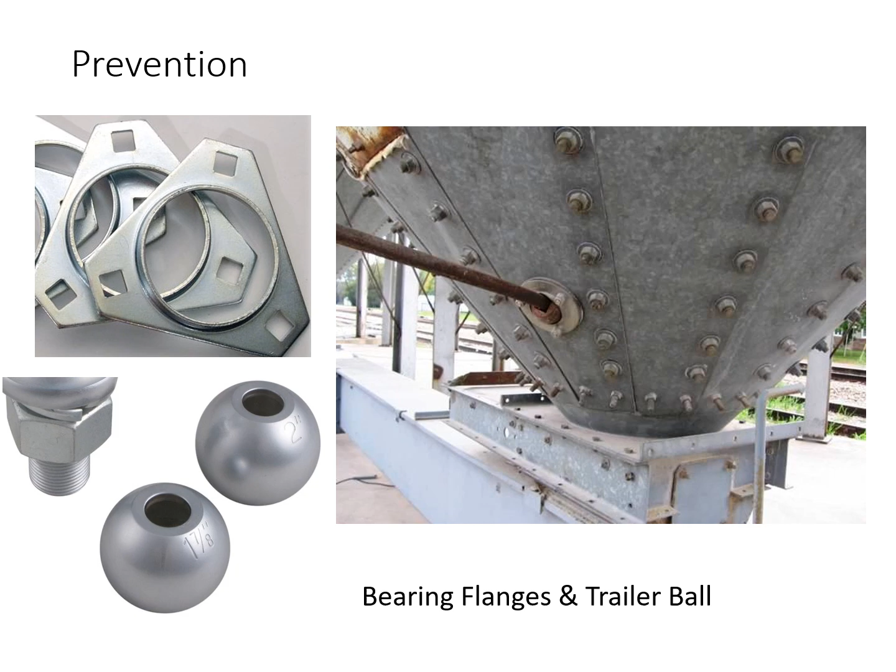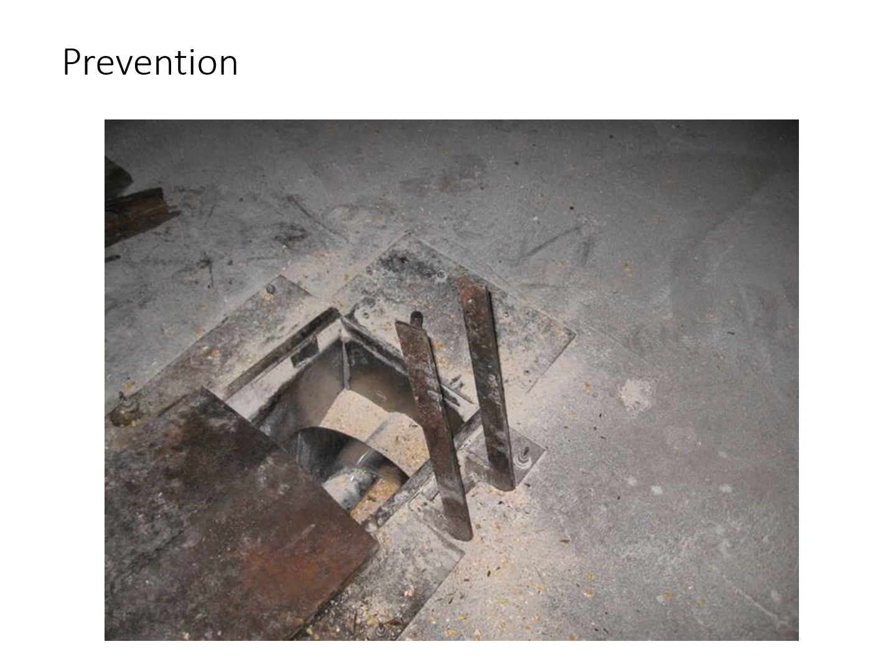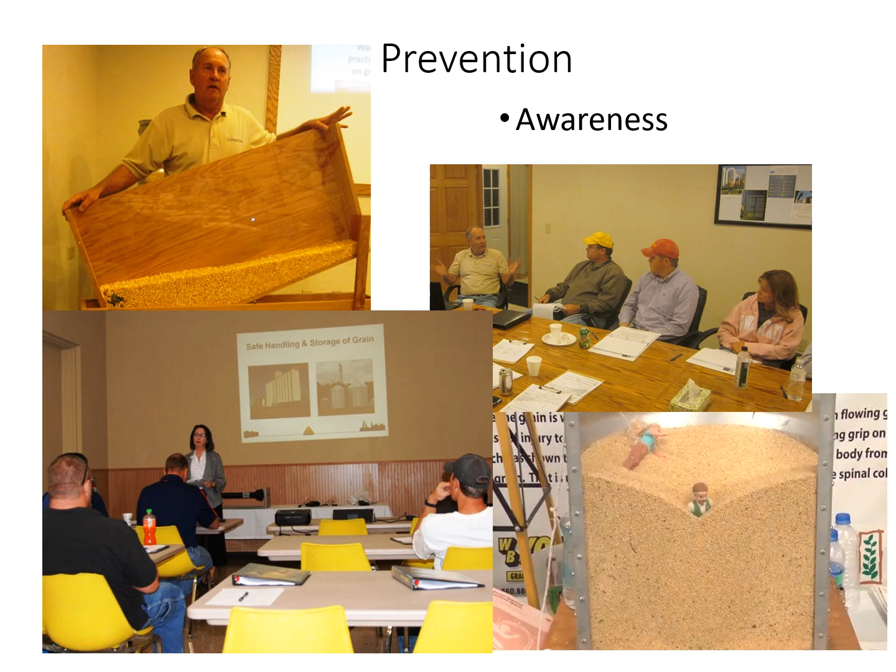Another aspect of preventing this type of engulfment or bin entry is awareness training. And you need to do both classroom and hands-on at your specific facility to train on preventing these types of accidents and injuries. Good quality grain can have an angle of repose ranging from 26 degrees to 15 degrees. In a 90-foot diameter bin, which is a fairly common bin size these days, that can be a 10-foot difference. And that's if the grain is of good quality.

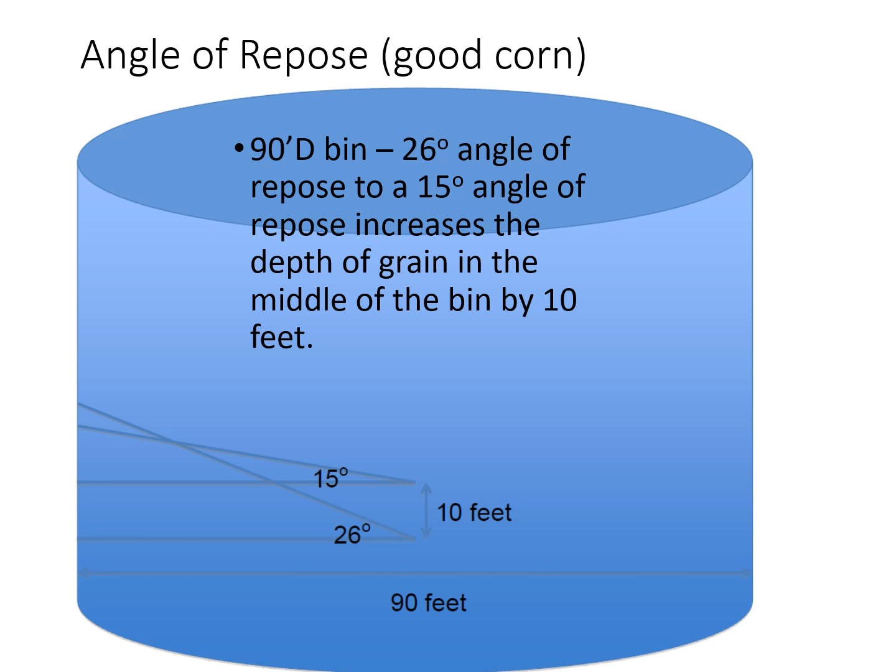You add some spoilage hanging up on the sidewall, or some chunks of grain, or some fines or some things, and that angle of repose can range a lot more, and you can actually have a much deeper difference there. So you have to really be careful, and that's why bin entry is just very discouraged, and you don't want to go into a grain bin unless you absolutely have to.

So I'm also a very big advocate of simulated entrapments. I think you're much less likely to put yourself in a dangerous situation if you've actually felt how helpless it is to be buried even up to your knees and waist in grain. And going through these simulations where your rescue personnel will get you out using cofferdams and using a team approach is, I think, very effective in teaching the importance of staying out of the bin, and also gives you a chance to make sure that your emergency action plan will work and that you'll have the right people available to get somebody out of a bin should they become trapped.

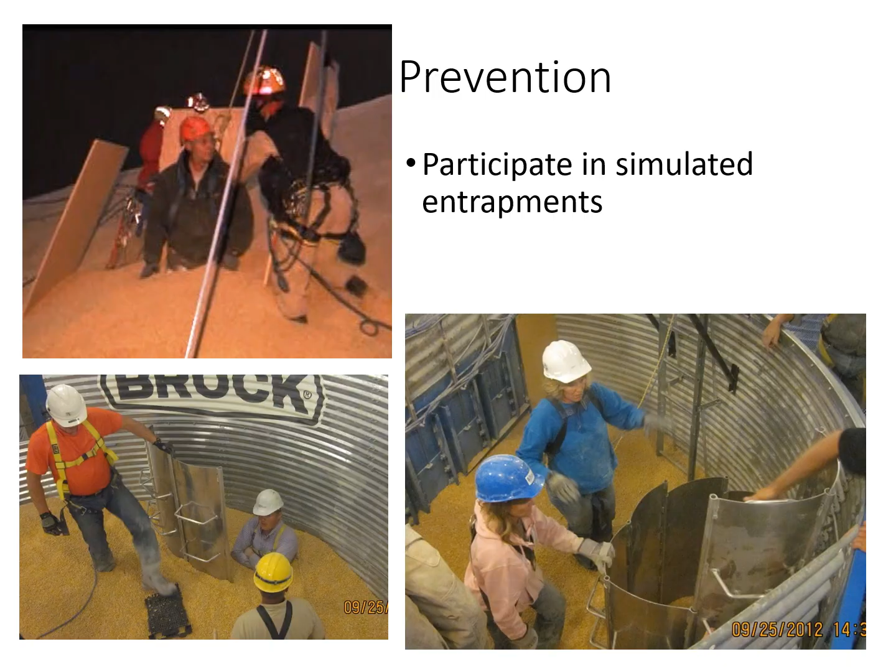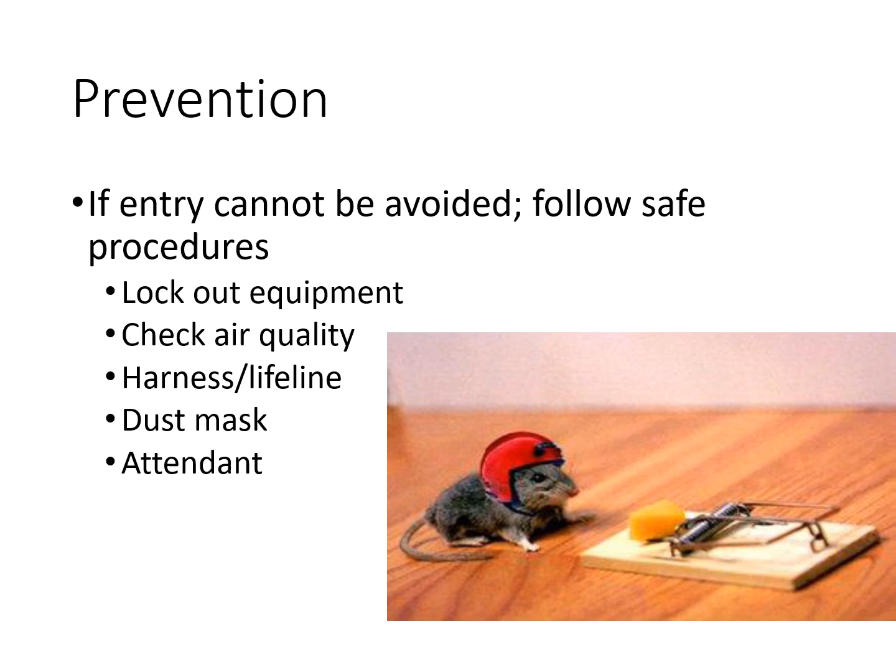If you have to enter a bin, you've got to follow safe procedures. Lock out equipment, check the air quality. You have to have a harness and a lifeline on the entrant. You have to have a dust mask if the environment is dusty, and you have to have an attendant manning that rope and being there to call for help should you need it. And by lockout, that goes beyond the electrical. It also has to lock out the mechanical, pneumatic, and anything that could enter that bin by gravity flow.

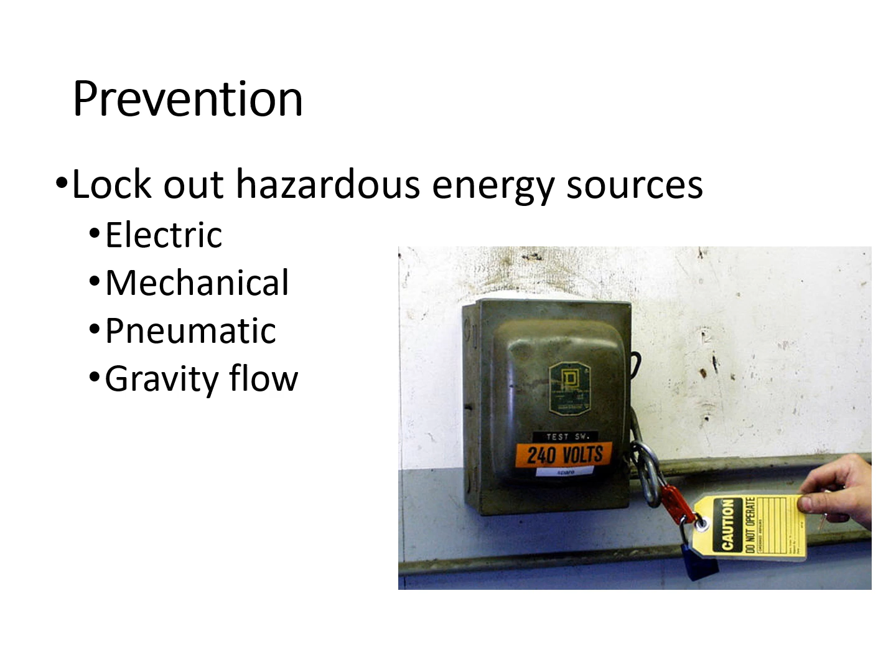Air quality is another big concern inside a confined space like a grain bin. You have to make sure there's enough oxygen to support life. You also have to make sure that there's no flammable vapors or any toxins in the air that you're breathing. And then, of course, just regular old dust is also a concern inside a grain bin. And the causes can be spoilage, mold, welding. We had that case in Waverly several years ago where the father and son passed away due to the welding gases displacing oxygen. And you've also got fumigants that you're possibly using.

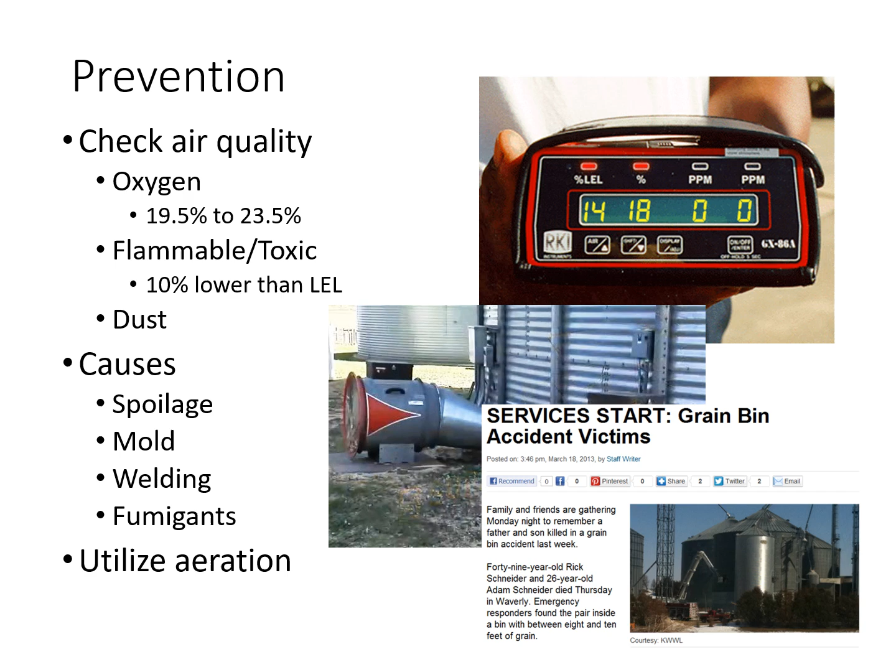And then also keep in mind you have aeration in these facilities. Use that, change that air, bring some good quality air in before you attempt an entry. Doesn't mean you can't test it. You still have to test the air quality, but use that aeration to bring some fresh outside air into that bin before you test it and do the entry.

We talked briefly about the harness and lifeline, and I want to focus a little bit more on that. You need to make sure that that attachment point is in the center of that bin. All too often I see lifelines being used and the angle of the grain and what's maybe hanging up on the sidewalls would still present a really high likelihood of engulfment should that grain flow. So make sure that a passing pulley is used and that you're attaching that lifeline to a point where it will prevent an engulfment.

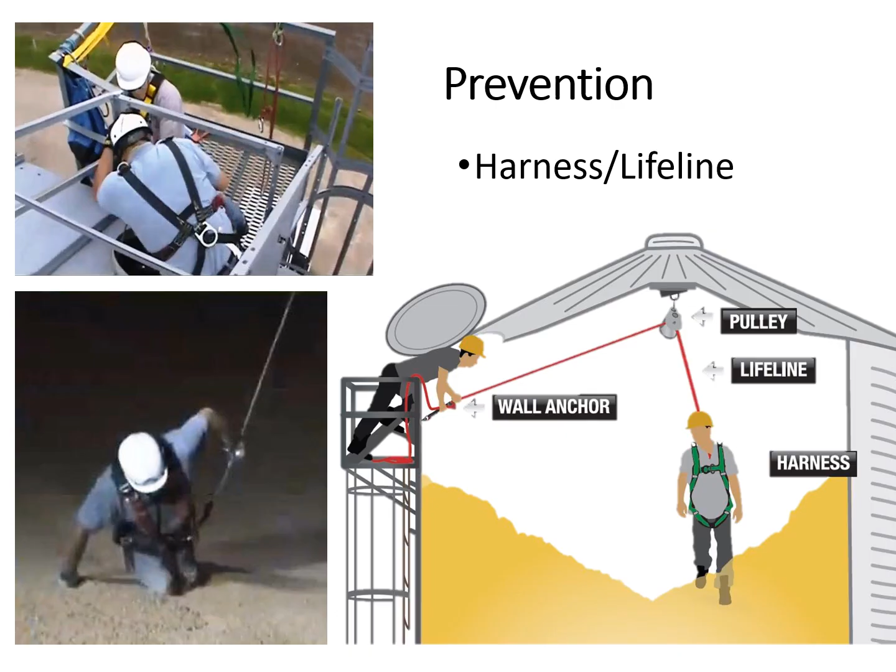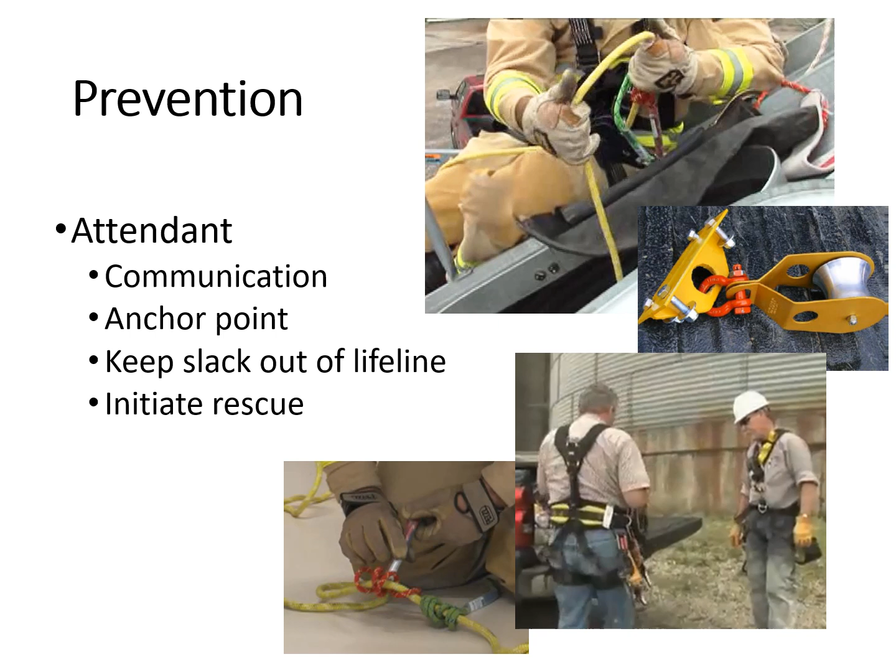That attendant is a very important piece of this bin entry for communication, to make sure that that anchor point is attached and the passing pulley is used and that we're anchoring at the correct point, and to keep slack out of the lifeline, and if needed, initiate the emergency response if something bad happens.

Just by way of an example, this is the actual entry permit of an engulfment situation that I was involved with in Ohio quite a few years ago. Employee went into a concrete silo cleaning beans, and the beans had actually had some quality issues, so they were hanging up on the sidewall. There was an attendant, there was a lifeline, there was a harness.

The reclaim was not running, but unfortunately, some of the beans that were hanging up came off the wall, engulfed the entrant to his shoulders, and there was really no way to get him out. It was an older concrete silo with just manholes both on the sidewall and at the top. There was no way to get cofferdams in. There was no way to get that employee out of the engulfment.

By the time they cut holes in the sidewall and got the cofferdam in and got the employee out, about 8 hours had passed, and he suffered very serious long-term disabling injuries to his lower extremities and to his internal organs because things just started to shut down. So this was a very serious injury, a very expensive claim from a monetary perspective, and it was completely unnecessary.

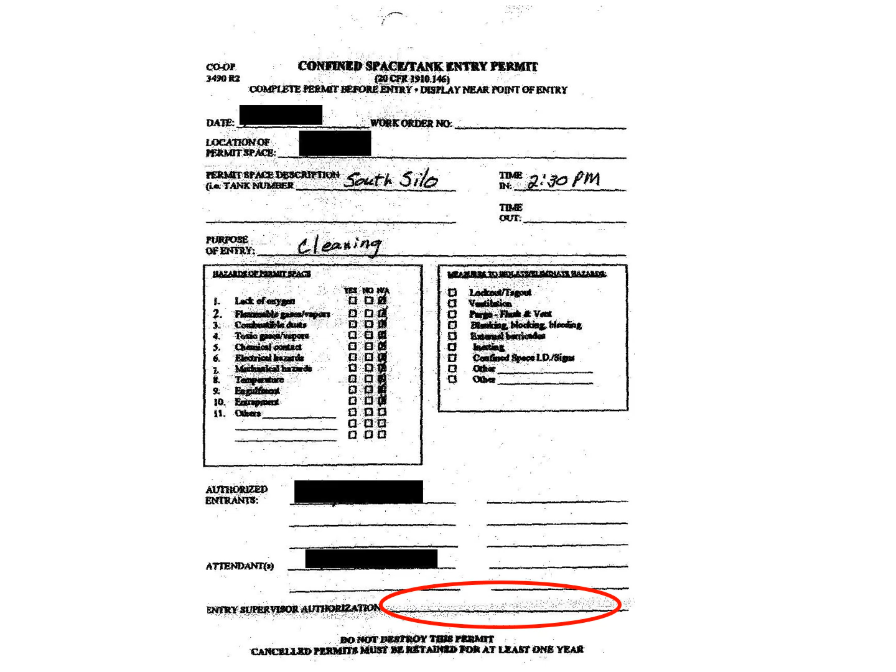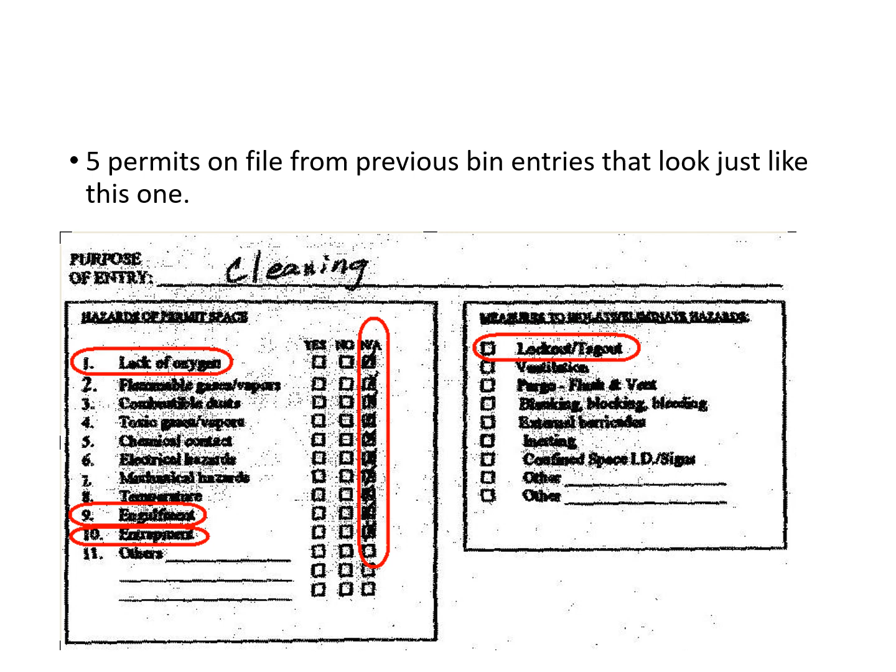When we looked at the file, there were 5 permits on file from previous entries that looked just like that one. They didn't do the oxygen testing. They didn't address the situation with the beans hanging up on the sidewall, and they hadn't locked any of the equipment out.

This is going to end some of the grain engulfment discussion, and I always like to stop on a somber note. This is a man in Kansas who died in a grain engulfment situation, 59-year-old Dwayne Seafried. The whole story is available in a video called Roberta's Request that was produced by Triangle Insurance many years ago. It's a great video. If you haven't seen it, I'd encourage you to look it up - I'm sure it's available on YouTube. This is a guy, hard worker. He was actually the chairman of the safety committee for this co-op in Kansas, and just a very tragic situation.

He went in to do a job that he would not have sent his employees in to do, unplug some Milo, and the grain buried him, and he passed away because of it.

I'm not going to take a lot of time to talk about this, but this is a quote that the CEO of that operation said, and this is a quote from that Roberta's Request video: We're gonna plan for inefficiency that will cause an employee to slow down and not put themselves at risk. If you can't do it safely today, then we'll wait till tomorrow.